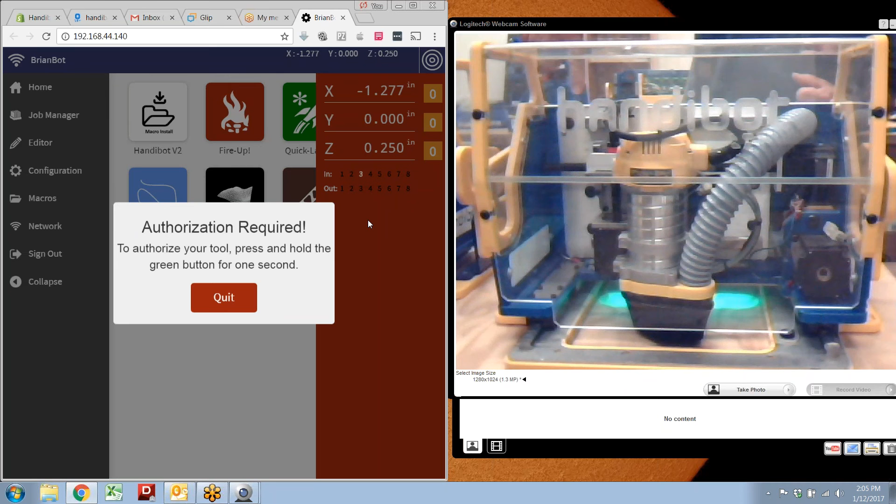Okay, so one thing you'll notice when you try to move your Handibot around is that you always are required to authorize your move. What that means is you have to hit this green button on the back of the tool and just hold it down for about a second, and then that allows you to move the tool around. And that authorization lasts for 30 seconds.

That's really a safety feature that we're hoping people will use if they're working in a classroom, just to make sure that nobody moves the tool around when someone has their hands inside it. But when you're working on your own, it's a bit of a pain, so I'll show you how to disable that to make operation smoother in your own shop.

To do that, you just go to the configuration menu in your FabMo dashboard, and there's a sub-menu under configuration called Machine. From that sub-menu you'll find options for the authorization button, and all you have to do to disable it is select the input and say no authorization.

Now, when I go back and move my tool around, it no longer asks for any authorization. That means if I'm running a job and I hit play, it's going to start that job right away with no questions asked. So just be aware that that's going to happen. But at least for me, when I'm working on my own, it makes things a lot easier.

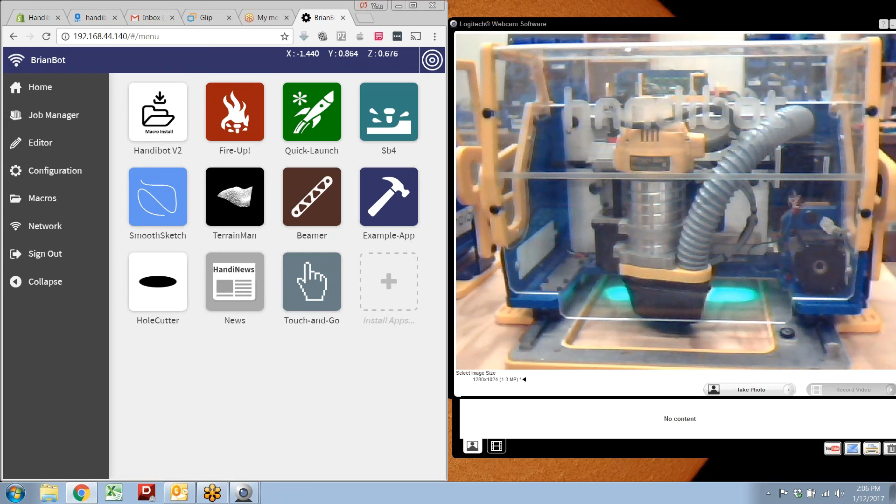I'm going to ask Jared to mute his phone so I can't hear Jared in the background.

Alright, so the first question I heard was about Z-zeroing, which makes sense as the next thing to talk about. Let me open this up.

Oh yeah, I just got reminded there's a link Bill sent everybody to download an extra app for your Handibot. If you follow that link and download the app, then install it using the Install Apps button, it'll be the Handibot V2 macro installer. Once you open it, just click to install all the macros on the Handibot, and that will update the macros that handle Z-zeroing, homing, tool changes, and a lot of other stuff, making Z-zeroing a little more reliable.

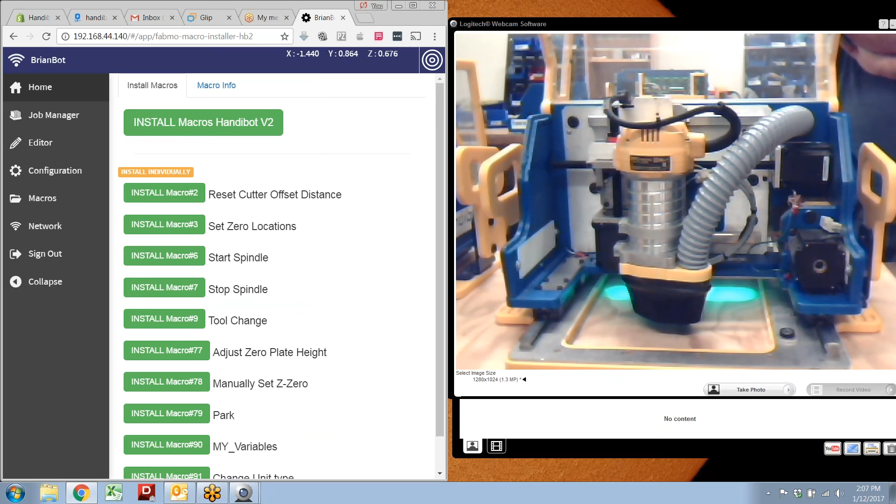So back to Z-zeroing, you've probably been using this plate right here. I know someone has already bent theirs up, and I can get another one sent out to you. To make sure everything is connected correctly, what's really happening is the tool—this clip right here—is connected to your bit, and then that completes a circuit with this plate.

You see there's an input number 1, right underneath the Z-axis position in my readout, lighting up when I touch this clip to the plate. That means the circuit is working. So when I connect this to my bit and the bit touches the plate, it completes the circuit, and that's how it Z-zeros. We'll go ahead and do that now.

Let me take this—yeah, I'm going to move this up and just pop this guy off. We can set him over to the side. So Z-zeroing, you do it from the FireUp app, and the function is called actually measuring the cutter.

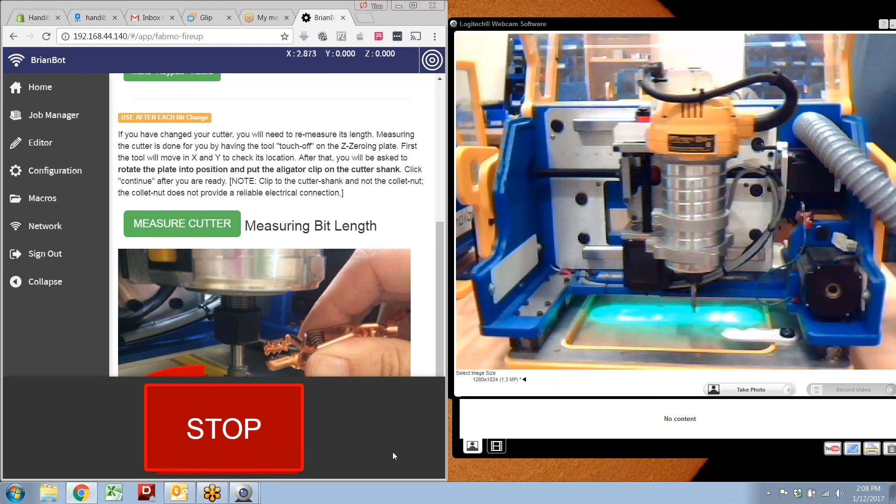What that did first was find the X and Y home, and it bumped itself off the hard stop at the Z-axis to make sure it has a reference point for the bit measurement. That way, if you lose position or the tool is turned off and you want to come back to the same spot, you can run the homing routine again and it'll find the same position. It automatically moves over the Z0 plate, and that's when I connect my clip and just hit resume.

So it does a fast touch, and then comes back for a more slow-moving touch to get an accurate Z0 measurement. You slide this back in, then hit resume to save that measurement.

Yeah, so can we ask questions as you go through? Oh, please do, yeah. This is Dan—so when I did mine, this is where it just drove that piece of aluminum right down. Mm-hmm.

And I did have the clip on there. Right, so did I do something wrong? Well, did you have it on the bit itself or on the black collet? Because on the bit.

On the bit, okay. That's why I'd say check to see if touching the clip to the metal on the Handibot actually lights up that input. Because if it doesn't, there may be something wrong with that circuit, and we can troubleshoot and get that fixed. So what's it supposed to light up? If you see on my screen the position readout for the tool, right underneath the Z-axis, there's a list of 1 through 8 inputs and outputs.

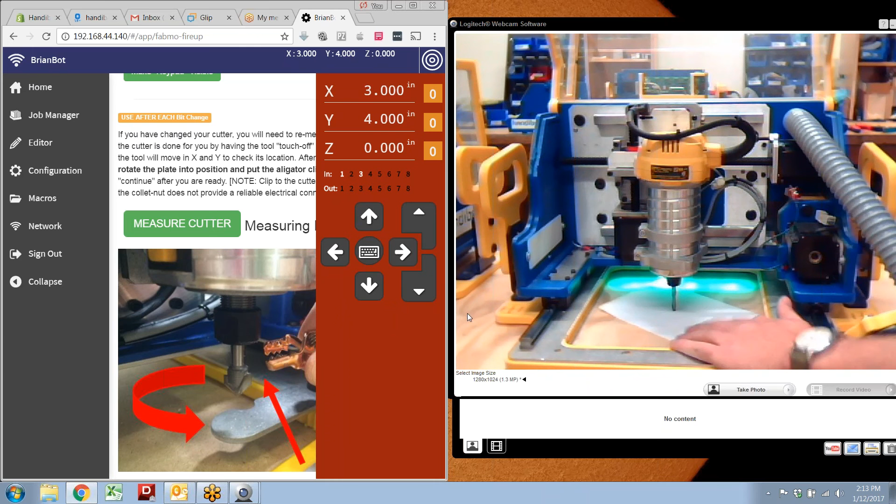Because I'm able to slide this paper underneath it, obviously it's not quite low enough. I want it a little bit lower, so I'm going to tweak this measurement to make this Z-zero plate more accurate. If any of you have worked in a machine shop before, you've probably done the same kind of zeroing method for an end mill.

You just slide the paper back and forth and slowly step it down. I'm using this directional keypad on the red bar, clicking the down arrow on the far right that controls the Z-axis. Every time I click down, it goes down by 0.005 of an inch, and I slide this back and forth until the paper gets stuck. That means my Z-zero plate default value was 40 thousandths too high.

So we'll just go correct that in the software really quick.

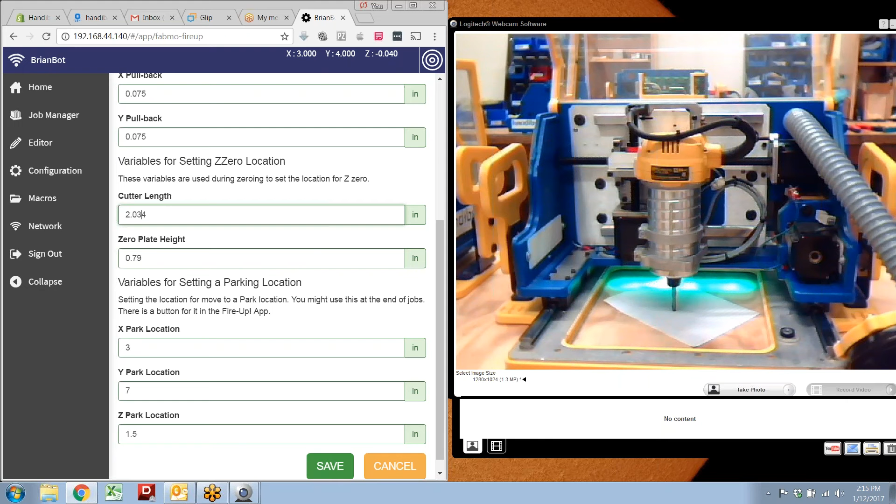And then I could either run the Z-zero routine again, or just update the cutter length here to 2.034, which will correct the cutter length and should make my zero measurement accurate. So I'll save that, and just to try it out, I'll send it back down again.

So I'll send it up to 1 inch, send it back down to 0. And now it looks like I got this a lot more dialed in. That's pretty much all you'll need to do.

You only need to reset the Z0 plate height once, and everything should be good. Or if you bend it, like what happened to you before, you can put the plate close to where you think it's level and adjust as well if you forget to put the clip on. Once the cutter has been zeroed, it stays zeroed as long as you re-zero with macro 3 after you repower. So I'll go ahead and run that now. When you turn off your tool, take it on the road, plug it back in, turn it on, and then run the XYZ zeroing routine again.

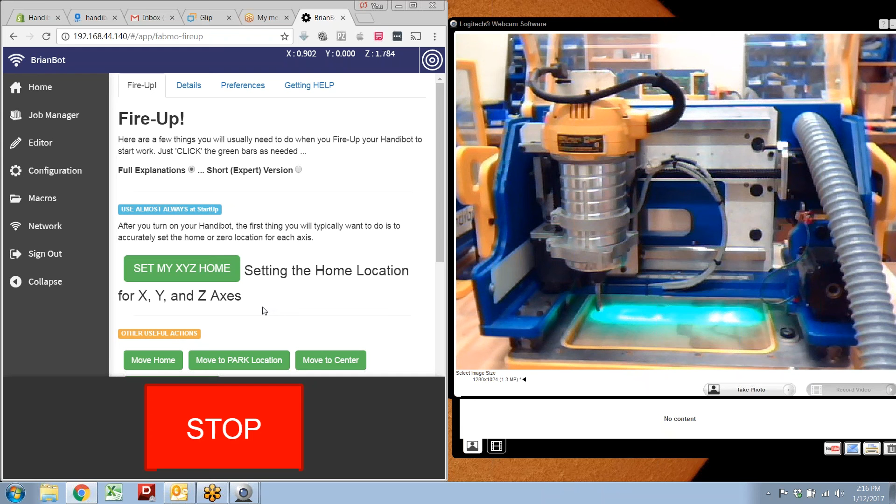Okay, just to be sure, I'll send this back up to the middle and drive this down to 0. And that'll return to the same spot.

Okay, so before we go any further, did anybody else have any questions about the homing macros?

Maybe show them how they get the same macros that you just showed in Fire Up — the macro page. So the macros themselves are all stored on this macros tab right here. The one we were using was the set 0 locations. If you really want to dig into it, you can come in here and, for example, edit where the tool goes after it finishes zeroing, but you really don't need to mess with these. If you wanted to just run them from here, it's a little faster — you can just hit play, and it'll run the macro directly from the list.

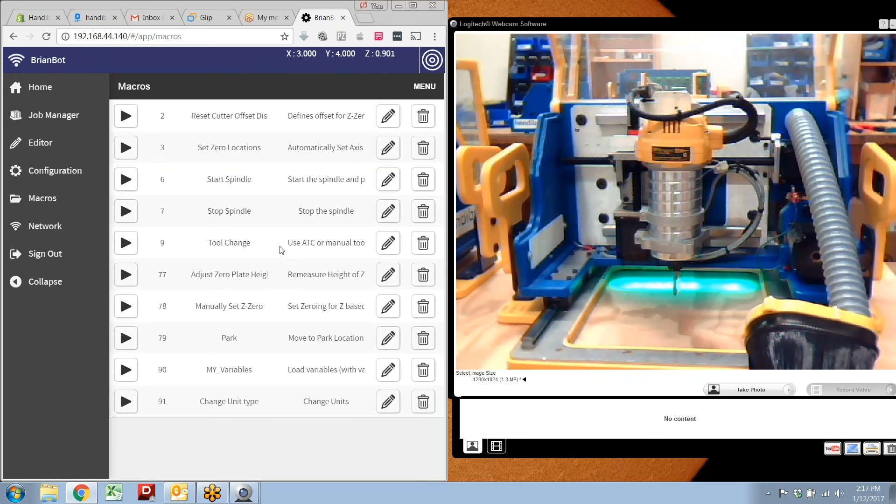So can I ask a quick question — the FMA file that you gave us, should that just be copied somewhere? So I'll show you how to install an FMA.

You just use this little blank app down at the bottom of your dashboard. If you click that, it'll open up a list — sort of like a file search — and you can type in the name of the app you want to install.

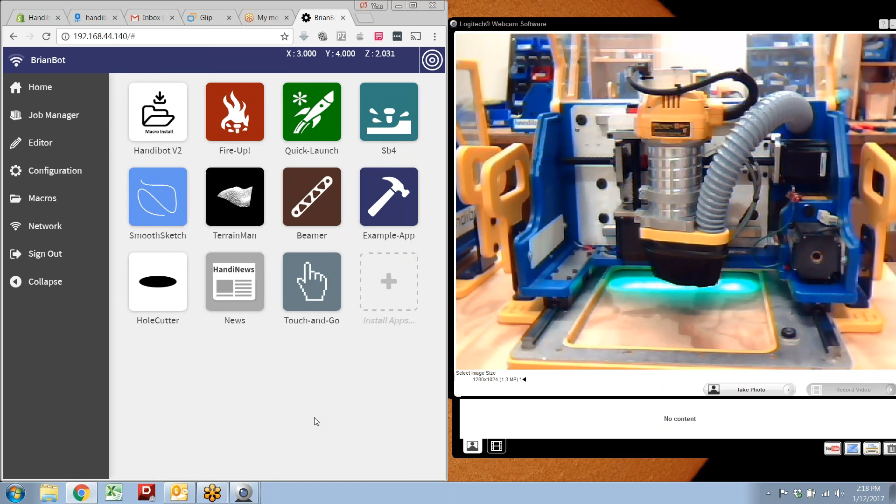So everyone, this macro and the way they're teaching you here is if you had a fixture on your system and you set that 0 position, you could just throw stock in and out and it would always set up. Now if you were just doing individual programs for yourselves, you don't really have to set a hard home — you can just go and touch off the X, Y, Z on any corner and just run it. So it'd be good if you guys showed them that too.

Yeah, actually I'm going to show them the way I usually zero the tool, especially in Z — that seems to be the quickest. It's kind of a quick and dirty way, and it's easiest for me, especially if I'm changing a bit. So I'll go ahead and change a bit, and I'll show you how I quickly re-zero it after a bit change.

What do you need? A pair of pliers. Okay, something big enough to get around it. Got it. You just want to call it a wrench?

All right, so changing the bit, you can take the router out pretty easily. Just unplug the power cable to the router, then loosen the couple of screws holding the router in the router bracket. There should be a little 4mm red-handled T-wrench that came with your tools that can pretty much loosen any screw on the Handibot.

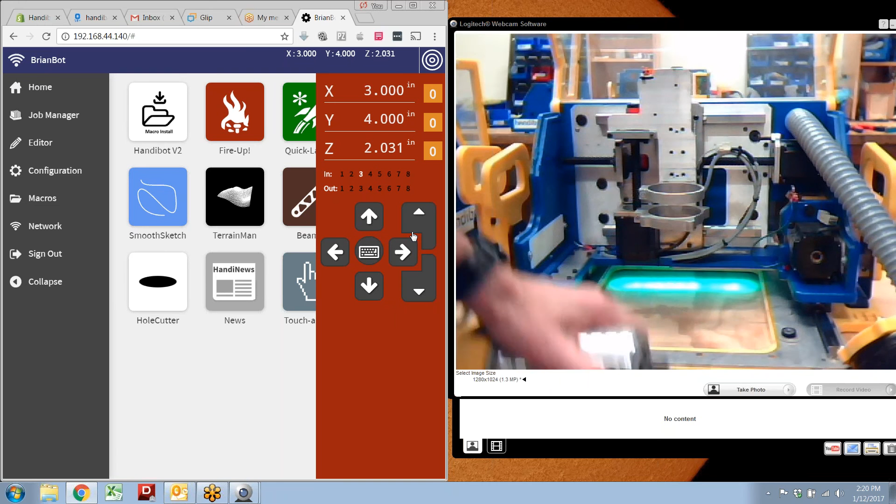So changing the bit, this yellow button right here will lock the spindle, and then you just use the little collet wrench that came with the tool to loosen the collet. It's also not too much problem to do that with the spindle still in the machine. Then we'll just clean out and make sure there's no sawdust in the area of the collet that needs to be folded up to hold the bit tight.

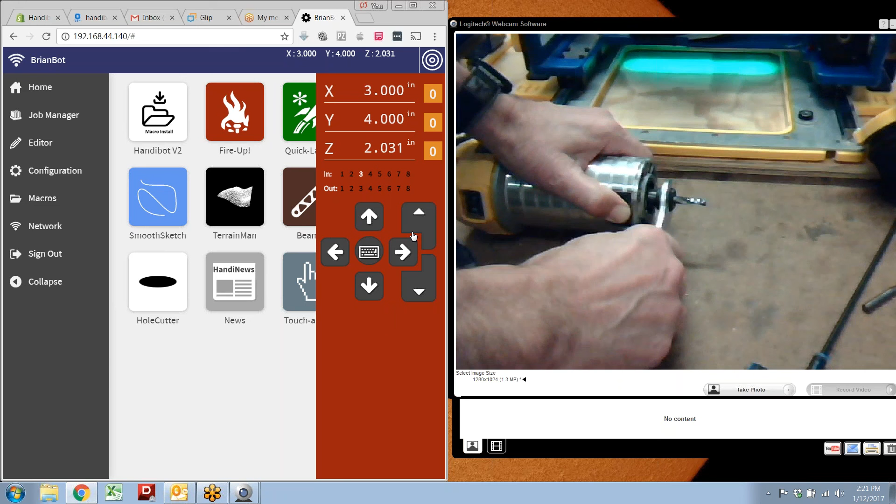Okay, so here's where my quick method for zeroing the tool comes in. Rather than putting the router back in there and running the zeroing routine again, I'm just going to send this down to what should be 0. Then once I slide the router in, I drop it down until the bit's touching the material, and then tighten the router bracket. Now my router is locked in at 0 with the bit directly on the material. Just plug it back in and you're ready to go. That's, to me, the easiest way to do it.

And if you're working on a material that's hard like wood, then that works really well. Now if you're doing something like foam that the bit could break through, then maybe you'd want to do the Z0 plate. But this, to me, is a lot faster.

Another way to do it is to break your program by tools, so you have individual programs by tool. When you're setting up a cut in Fusion, you could save each tool path out based on what tool it uses, and then the program will naturally end. You change your tool, change your bit over, then start the next one. So yeah, that works as well.

So any other questions about finding home with the tool or zeroing the tool?

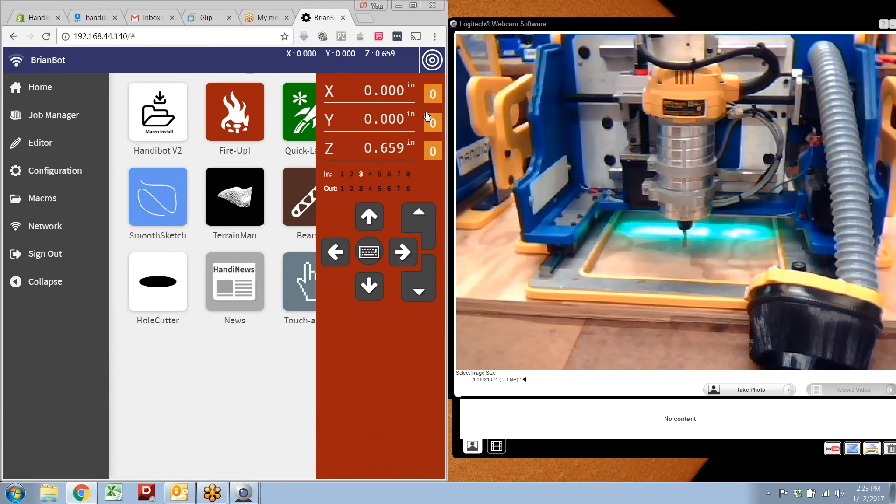Now if I want to set up an alternative 0 point, like if I had set up a carving file that was centered around the 0, 0 location of the tool, so wherever I zeroed the tool, that's where it was going to cut the design, I can manually set the 0 by clicking these orange 0 buttons next to the axes readout values, and now that's my new home position. So if I go somewhere else and then send the tool home by typing in 0, 0 for the X and Y, it's going to go back to that position I just called out as home. That way you can do an alternative homing if you don't want home to be all the way to the left and front of the tool.

That's not saved, though. If you do it that way, it's not saved between sessions. So when you go back through the Z0 routine at the beginning, it goes back to whatever's been saved originally after a restart.

So I've got a question for y'all. How many of you have run jobs on your tool yet? Have any of you run tool paths so far? Not yet. I know Ivan has, right? Nope, I just got mine connected to the network this morning. Okay.

So now we'll skip over to running tools. Really all you need to do when you turn the tool on is do this homing routine, get everything set up, and then you can jump right over to actually running your tool paths out of Fusion.

So the Job Manager is the app that controls all of the cut files that you're going to run. When you first come over there, you can either drag files there, or just click that icon and it'll bring up a search window that lets you go find a cut file. In this case, we're using Shopbot part files, and I believe there's a post that's active right now for Fusion that'll output a Shopbot part file. But we can also run G-code as well, if that's what you have.

When you load your file, you'll get the option to preview it by clicking the little eyeball icon, and that'll give you a preview of what the cut file is going to look like as it runs. You can also edit the file if you need to, if there's anything you need to change, like a move speed, and then you want to run it again.

Or you can download the job. If, say for example, you've got a job that's been stored on the Edison for a while and it's not on the computer you're accessing the tool from, you can download that file to your computer and save a local copy, or you can just delete the job.

So once you've loaded a job into your tool, even after you delete it, it's still stored in the history of the tool once it's been run. Let me go back and load a file again. So any job that you run will be stored in the tool after that.

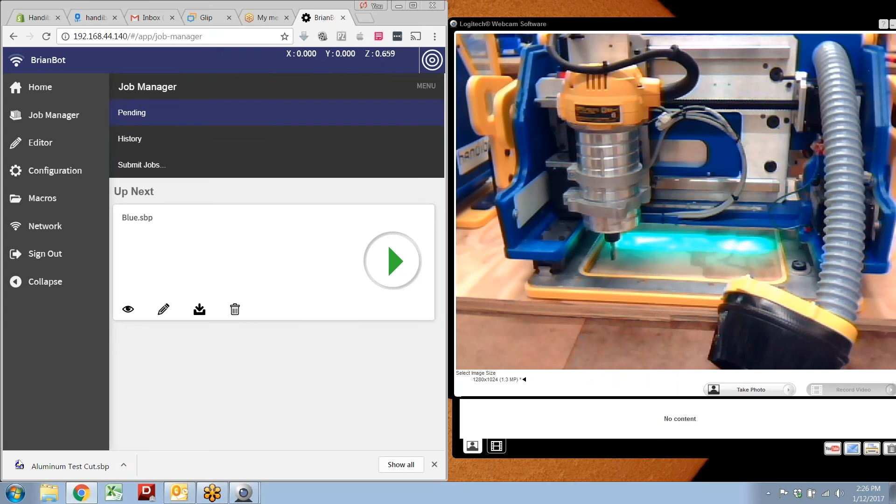I'm not sure what this job is. I'm going to move the Z way up so that I don't cut into my table by accident. And we can pop that dust foot out. So to run, hit the play button. If you still have authorization enabled, you'd have to press the green button after hitting play, but I've disabled it, so I won't have to worry about it.

This is warning me that there's a tool change somewhere in my file. That's fine, I've just got multiple tool paths, but they all use quarter-inch bits, so I'm not concerned about that. But if you do have a tool change, it's going to warn you here.

So you can see there that if you hit that flashing stop button at the bottom of the screen, it'll pause the movement of the tool. The spindle will stay turned on and stay down in the material, but it'll just pause the actual movement of the cut. From there, if you hit resume, it'll continue doing the cut, or quit will exit out and turn the spindle off.

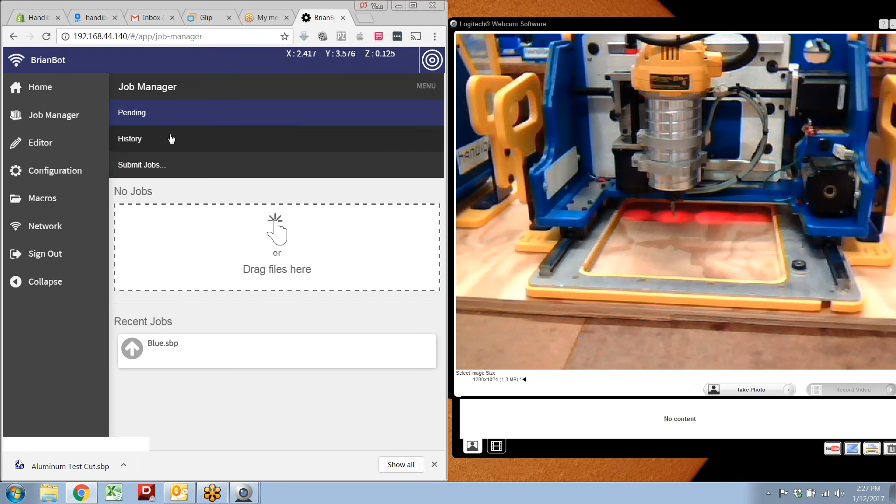So now that I've run that job, it's stored in my history, and if I want to, I can load it back into my queue and run it again. So now that's kind of permanently there. And if it rolls off the bottom of the recent jobs screen, I can go over to history and find that job, add it to queue again, and run it again if I want to.

Do you have an option for pause to stop the spindle as well? Not yet. It seems like it would be pretty trivial, but the trick is that to stop the spindle, it's got to pause, and then it's got to run another line of code. So that's actually going to be an update we're going to release next week, because that would be really helpful for me, I'm sure.

In the meantime, could you just flip the power switch on the router head? Definitely, yeah, let me show you how to do that. So now it's just paused, and I've just turned the power to the router off. Of course, if I hit resume and forget to turn the router back on, I'm going to gouge into my material and possibly break my bit. But as long as you remember to turn it back on before you start, that works just as well.

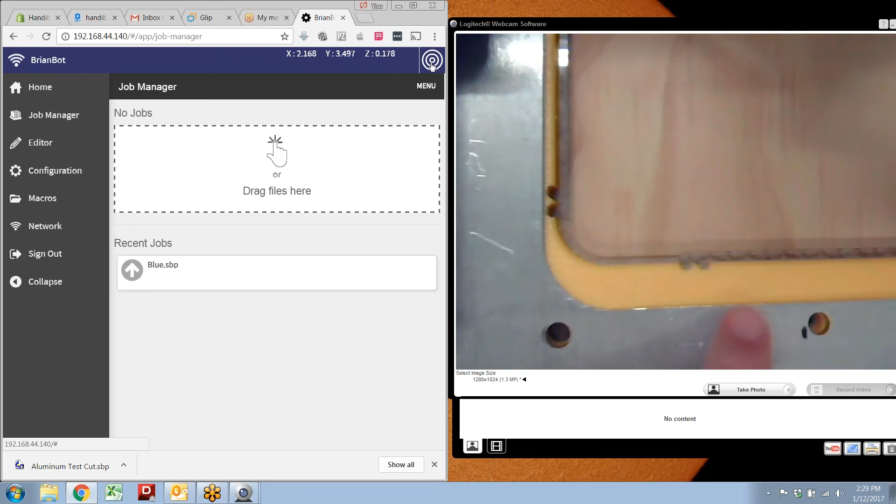Can I ask a real silly question? The XY00, is that at the lower left-hand corner of the screen? Because if I'm looking at where that yellow area is, it's filleted, so is the 00 the filleted area? The 00 should roughly line up with these two marks on the base plate of the Handibot. Okay, so it's inside. Yeah, the bit 0 will be like right about there. And just so everybody knows, I think either Jared or Jeff has this wooden fixturing plate on it. I took a piece of wood and rounded the corner to match that fillet and screwed it down to the base plate of the machine.

And then I just ran a contour right along the X0 and then Y0 lines, just to have sort of a fixturing plate, so any block of wood you slap in there is automatically zeroed. I can share that Fusion file with everybody if anybody wants it. Yeah, that would be helpful. Just put a line with a V-bit on there, and it looks real.

The other thing too, Dan, is there's two zeros. One is the hard home for the machine, and the other one is the one you set right before your program. So your XYZ 0 right before you start your program can be anywhere, while machine hard home is one fixed place.

Right. Yeah, tool zero and file zero are not necessarily the same place.

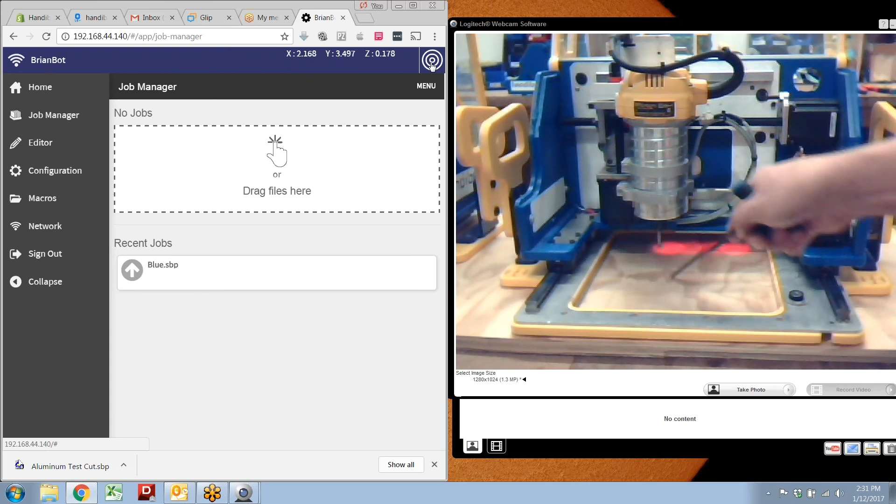A lot of times I'll use that when I'm cutting out a lot of small disks like this. If I just have the file set up to cut one, I'll cut one here, then move the tool over, re-zero the x-axis, and run the file again. It'll cut out the same exact thing but shifted a little bit. I can keep shifting the tool around and re-zeroing it to cut multiple copies without setting up a big file with a bunch of nested parts. It works like a cookie cutter that way—you find an open spot on your board, re-zero the tool, and run the file again.

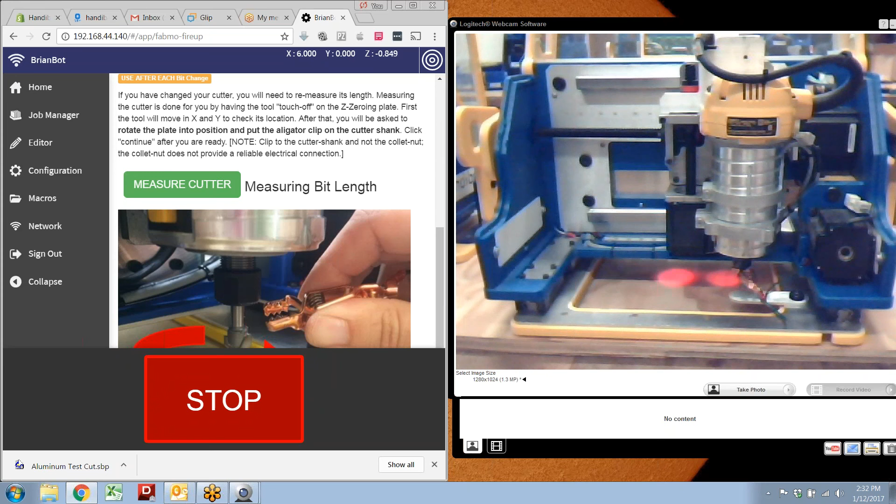Ivan, this is Jeff. Is this meeting supposed to end at 2:30, or did I not accept the right meeting? No, the first one was just the general CAM meeting that I added because it was always at the same time. This meeting will go as long as they're presenting. Okay, just checking, I may have to jump off. I'm going to need to jump off in a second too. Well, I'm here till 5, so I'm happy to stay as long as anybody else would like. Don't feel like you have to stick around if you've already got what you need. Please share the recording with us. Of course, this is super helpful though. Good, thank you, no problem.

Okay, so I got my tool zeroed. I'm going to type in zero to send it home. Now I'll pick a job that hopefully will work with a quarter inch bit. Let's see.

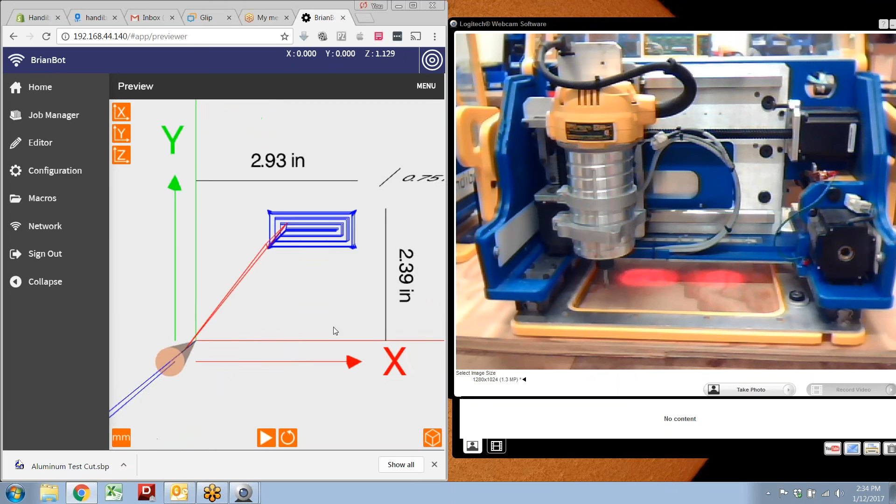So you're going to save your NC file or your ShopBot file locally somewhere out of Fusion, I'm assuming. Right. I don't know what Pocket 3 is, but that's what we're going to run—we'll find out. Well, I guess we can preview it and see what it's going to do. Okay, so this job looks like it's going to just cut out a little pocket in our material, which is supposed to be 3/4 inch thick, which is correct. So we're all good.

All right, so back to Job Manager. Hit play. Is it turned on? No. Okay, now we are. All right, here we go.

Uh-oh. Oh no. Well, that's an interesting problem, guys. Let me take a look at that file. That was weird about that one. There's no stop button—there's no stop button.

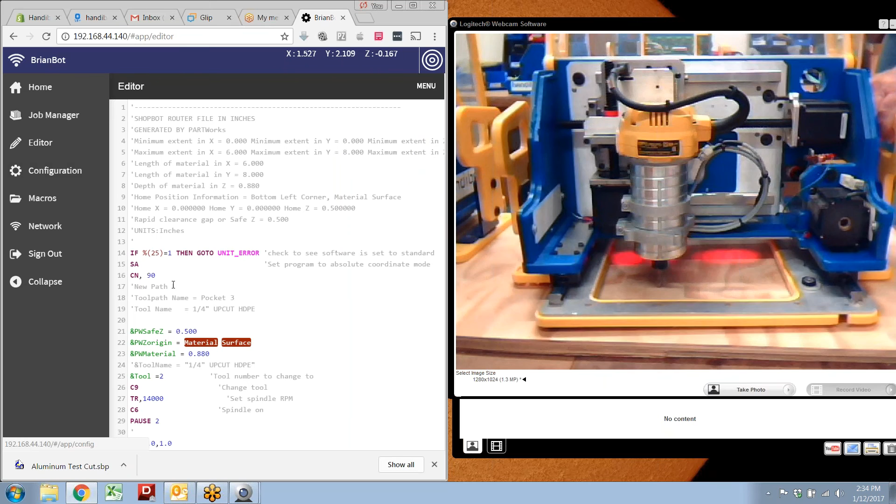There we go. So, welcome to a demo for your peers. That was a good example of that little red button on the side, which you might not be able to see—this one right here, that's kind of like the 'oh shit' button. So if you lose control like that, you can just hit that button and it'll stop the tool.

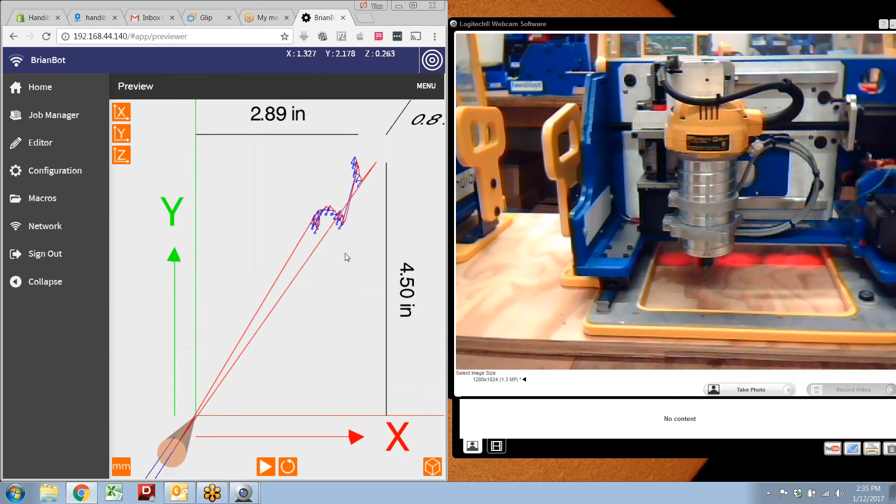Okay, let me find a different file. Let me see what this one looks like. Why did the router go? Looked like your spindle just didn't turn on. Well, it turned on, then it turned off. And then it didn't even let me have a stop. But I'm not sure if that was an issue with one of the macros called at the header of that file.

So Ivan and I worked on the post processor for Fusion a while back, because I think Ivan you were having a similar problem, and there was something the post processor was putting in the header of the file that was tripping up FabMo. So I wonder if that might have been an older file I had run before. So let me run a different one, and hopefully we'll do better on this one.

Okay, so I've added this job, blue, to my queue, but it still has this pocket job up next. So I'm going to trash that one, and then run blue.

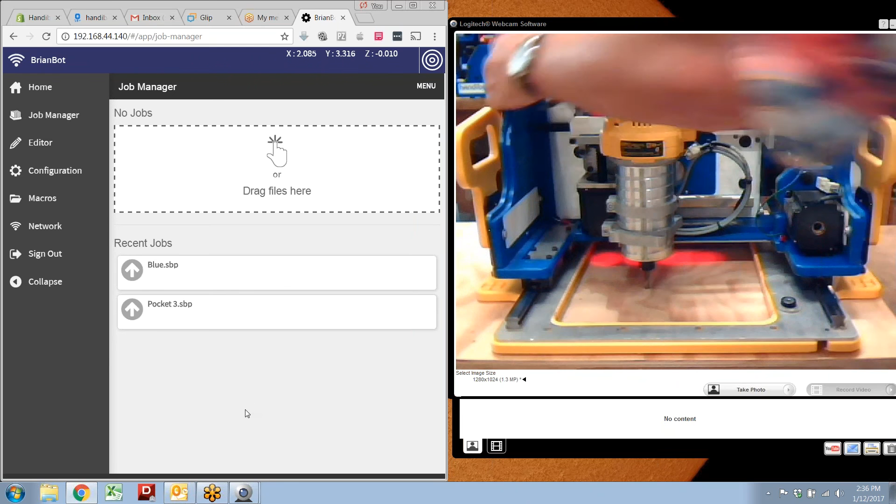All right, let me try one other thing. So we'll do a smooth sketch, which is like the most basic kind of job you can do. I'll just draw out something here, my name. And this should create a G-code file that the tool has no problem with.

So, are you cutting material? Are you holding it down somehow, or are you just cutting air at this point? Yeah, the tool weighs about 50 pounds, and there's a neoprene rubber bolted all on the base, and that holds the tool in place pretty well.

So that is not, I mean, unless you're really hogging out some material, I don't ever really worry about holding the tool down. You could, of course, drive wood screws through these holes in the front of the tool if you really wanted extra holding power.

Yeah, I think a couple of your setups actually have a sacrifice plate already on it, and you're not cutting through stock like that. So what you would do is clamp the piece you want to cut on top of the sacrifice plate. Or what I do a lot too is save old cardboard boxes and use those as a substrate underneath my material, so that if I break through the material, it's not going to cut up my table or whatever.

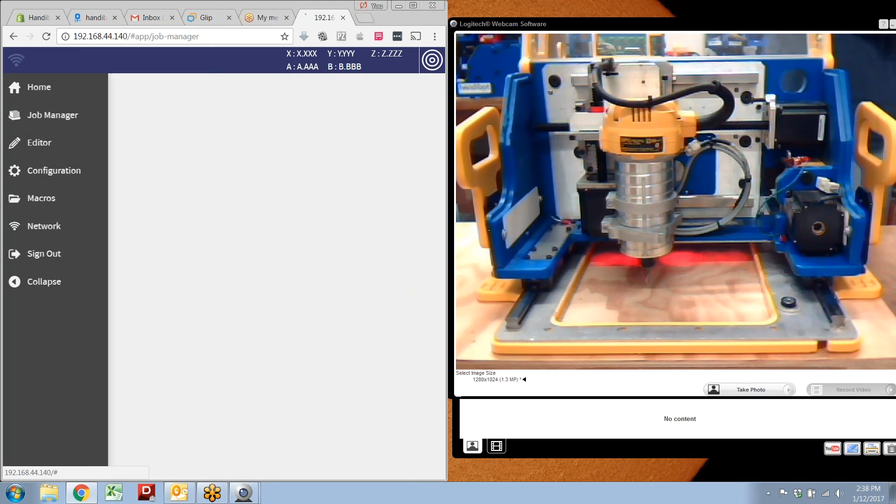Okay, so your zero is really the top of the material that you're cutting? Correct. I'm thinking zero is the bottom of the material, but it's really the top. That depends on how you set it up in Fusion. For my guys, and for beginners, what you should really do is pick the bottom left-hand corner, because it's easy to get to, set your 0,0 to touch the front face of the stock and touch the side face of the stock. So just use that to start from now, guys. Yeah, and zeroing to the top of the material is a lot easier than zeroing to the bottom of the material as well.

All right, so let me see if I can get this. While that was running, you could see there was a little progress bar at the bottom right that gives you a rough idea of how far you are through the code on the job that you're running.

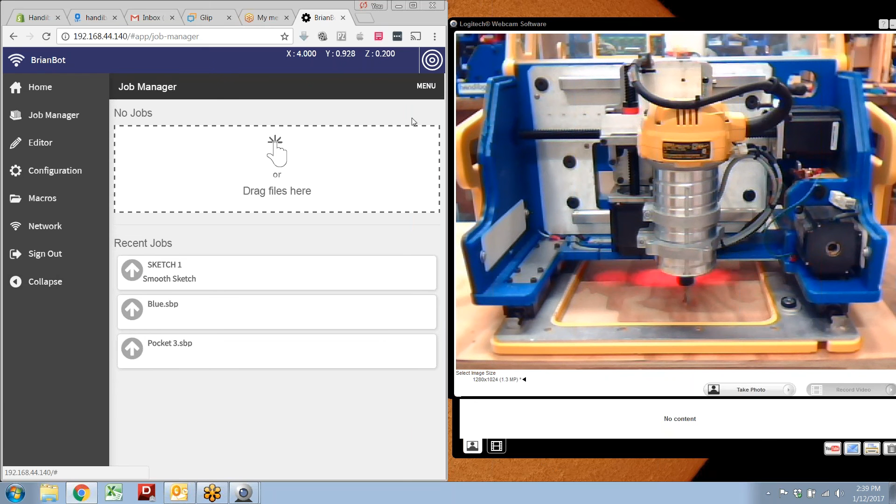I needed to zero the Z again to get that one down to material, but that would have drawn out that sketch. So let's preview it, the sketch that I created earlier. Yeah, so that would just be a carving or an engraving of that sketch. If you have a V-shaped bit, then that works really well for doing quick engravings.

So yeah, we're kind of, like I said, we had just installed a new version of the software, so we're trying to figure out why the router was turning off. But the versions that you have are possibly a bit older than the one I have installed today, so hopefully this isn't really an issue for you guys. So if you try out a toolpath and the same thing happens to you, definitely email me, and I will figure out what's up with the code in your file and get it fixed for you.

So one other thing that I want to show you guys, it's a problem I run into myself a lot, and that is the... One second, Brian. Oh sure, go ahead. Jeff Lee, you still on?

Yep. Okay, so in the gallery they have a couple more of these, and they got the post processor working good in there. So if you could get a copy of the post from them and distribute it, that would be good. Okay, oh yeah, I'd love to see that as well too. I've got a customer working with Fusion right now trying to troubleshoot the post processor. So yeah, if you guys have that copy, I'd like to see it as well.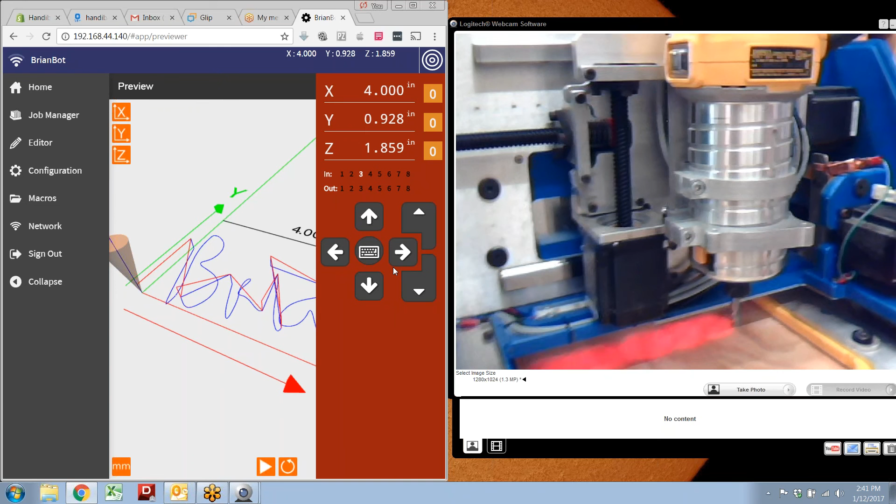So what I wanted to show y'all was the bottom of travel for the z-axis is determined by this bolt right here, and that's really not like a hard stop. It's just there to keep the tool from crushing any of the wiring down here.

But what happens a lot of times is someone will zero their tool and think they're ready to go, but if they're cutting through something that's an inch thick, their zero point needs to leave at least an inch between this surface right here and this bolt head right here. And if not, then the tool will come down, hit the bolt head, stop plunging into the material, and it won't cut all the way through.

So almost, I would say 80% of the time that someone's afraid that their z-axis is broken, it turns out that we just didn't have enough travel left on the tool. So just something to be aware of when you're setting up cuts.

The kind of cool thing about the Handibot is that not only can you remove the router or move it up and down in the bracket, but the bracket itself has multiple locations that it can be attached to that Z plate. So if you're using a really long bit, like later today I'm going to be doing some engraving using this diamond tipped engraving bit, which is really long, I'll move this router bracket up to one of the upper positions to give me enough room to move this engraving bit around on these dog tags I'm going to be doing down here. So just something to keep in your back pocket for when you need to make something work in a tall piece of material.

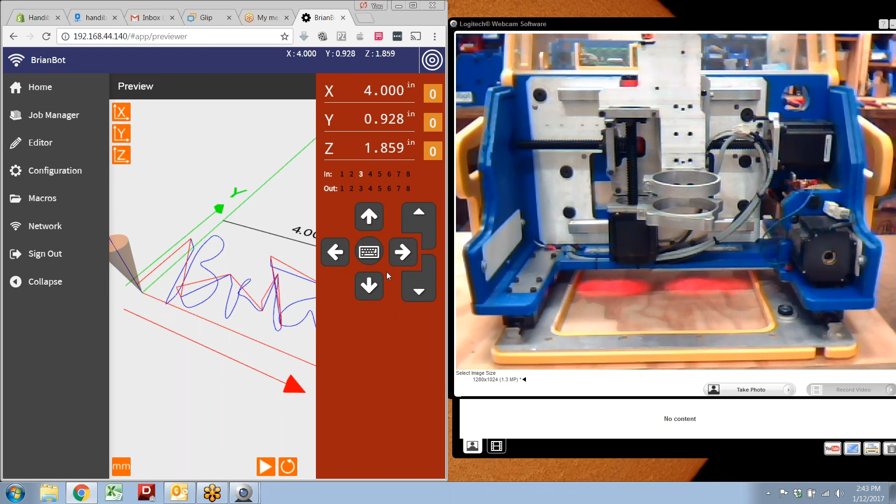Okay, so while he's gone, once again just to review: you design your model, you put your tool paths on it, and then when you go into setup, you set your zero position, which will be the lower left-hand corner, top of the part. Then you come in and set the tool to that same position that you set the setup point on. So it'll be the lower left-hand corner of the part to the center of the cutter.

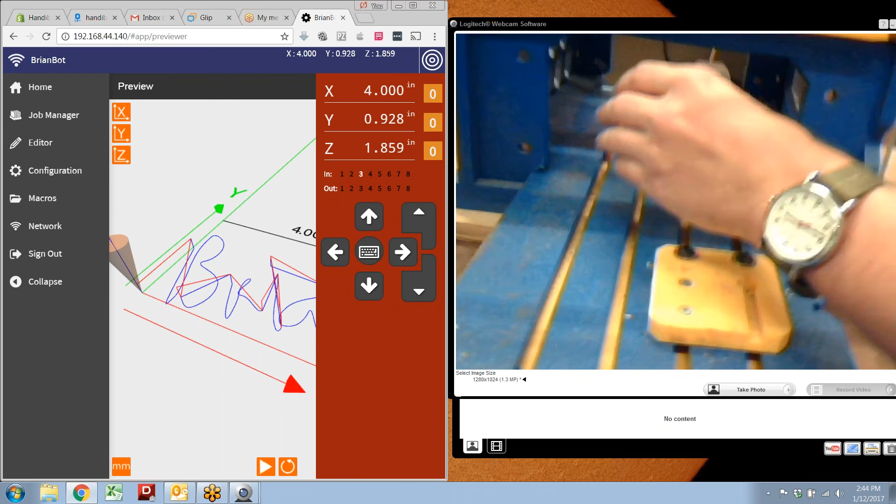So yeah, this one's a little bit beat up. This is the one that's been living in my garage for the past couple of years, but this is just what we call the accessory base, and it's sort of a plastic version of T-slots, and you use the same T-nuts and screws that you would on an aluminum extrusion. We mostly use it to hold down the rotary indexer. But we've had guys that have used this for long boards that they want to index through the tool, you can just slide a big 4x4 board through the tool that way. It's just a nice way to keep the tool secure while you're working on something large underneath the tool.

But you don't have anyone that just goes in the Handibot as it comes, right? You have to have that auxiliary. Yeah, I think y'all might have been a bit early. There's that piece of MDF that's attached to the bottom of your Handibot when it's shipped to you.

Does yours have any slots on the back? I'm trying to remember. There was one afternoon where I was trying to work on some boards, and I'd flip one of those over and cut slots in the back and put these little inserts in there that lift the tool up and give you kind of like a 1.5 inch throughput area you can work underneath the tool. And I started shipping that with Handibots, so I'm not sure if that was on the ones y'all got. No, it wasn't. Okay, well, I can get one of those out to you, Ivan, if you want to take a look at it. It's just sort of like an MDF jig.

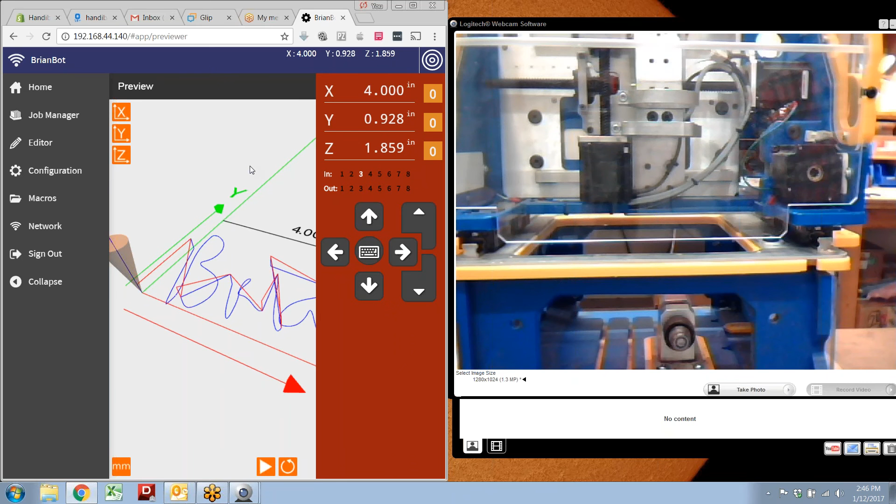It just kind of makes it easier. I've been doing a lot of sign making recently, and it gives me an easy way to slide my boards through when I'm doing sign engraving. You got your regular test base board that ships on the Handibot, but now when you flip it over, there are these additional slots that you slide these little keyed pieces into, and you bolt them down, then you set the Handibot on top of the whole assembly.

Oh yeah, we got that board, I thought it was something else. If it came with these little L-shaped pieces, you can use those, and it creates a pretty effective little jig that will support the Handibot and allow you to do some more large material work.

No, I'm more talking about affixing stock to the sacrifice plate. Oh yeah, like if you guys have a low profile vise, or a T-slot table or something like that. There's a really low profile T-slot that we use as the deck on one of our larger tools, the Desktop Max, which might actually be pretty good for that.

I got a piece of that right here as well, let me show you. So this is like a real thin profile aluminum extrusion. That's kind of what you're thinking about? That's exactly what I'm thinking about, because then you can put the Shop Box paint clamps on it and a bar, instantly hold stock.

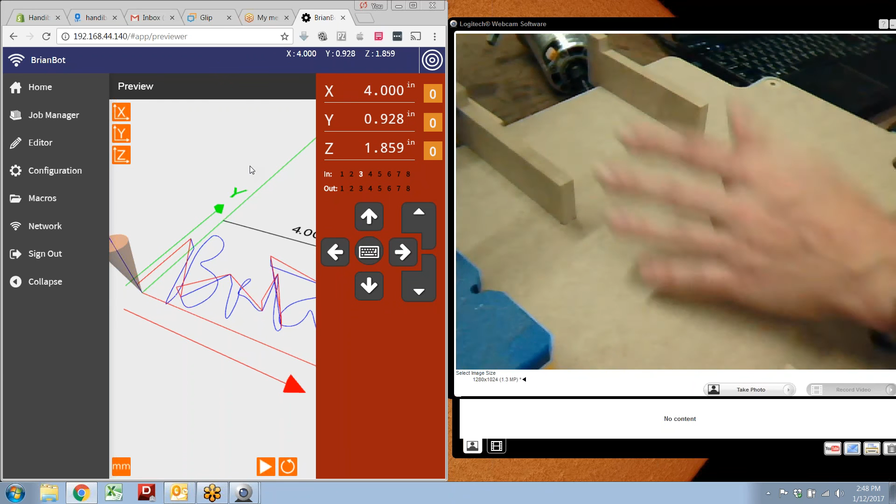Yeah, that would be great actually. Alternatively, for the vise, what I've done in the past is I've just milled out a rectangle the size of the vise in my material, and popped it in there. I like that method because when you mill the pocket out for the vise, you know it's going to be square to your tool, since you're pressing it up against an edge you milled with the tool. And the base is going to be perfectly flat with respect to your tool.

So that's a real quick and dirty way to do that kind of job. You can do it on just a piece of plywood like this—put your tool on top of the plywood and mill your pocket into that, like someone else was saying, to make a jig.

I was thinking more of the plastic side, because it would be easy to machine, and I've got big routers so I could cut it if I had materials. Let me show you how this is put together in an interesting way. This is just two pieces of plastic—you see how we milled a step in this one, and then it's bolted from the bottom into this larger piece of plastic, so you create the effect of T-slots using just two pieces of plastic.

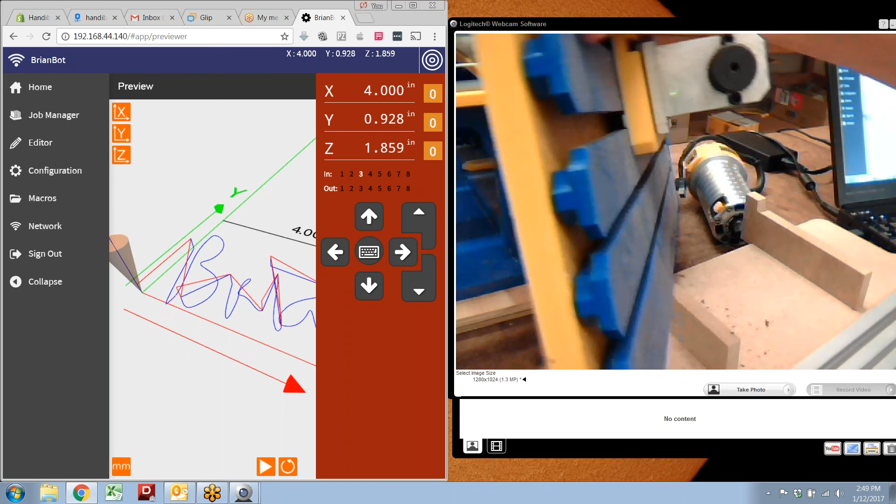So you can kind of make your own. This kind of HDPE is available from Inventables or even Home Depot sometimes. It's called King Starboard—sometimes you call them cutting board blanks too. You can get them in like 2 foot by 3 foot or 2 foot by 18 inch. It's like a boat deck material, the exact same stuff as this, just more natural tone colors, and you can get that at some hardware stores.

I think all these guys need a quick fixturing system so they can have multiple projects, know how to set it up, and easily index stuff out. I don't know if you've ever talked to Sally, but she works with ShopBot, and she does a lot of really cool fixtures for trade shows that she goes to.

She'll do a lot of nameplate engraving, so she'll make a bunch of blanks to carve people's names into, and she'll build jigs that let her swap them out really quickly. Even bases that slide out, so you can pop the base out, replace the blank, slide it back in, hit go, and it always goes to the same place. So she's done a lot of thinking on that problem.

We'll show them the collar on the router so they can change over routers instead of changing bits. Bill just reminded me of another thing we've been doing to speed up the multiple tool cut process - this little plastic ring, kind of like a hose clamp, that's a collar that grabs your router. Because you can unplug the router from the tool, it's a lot easier to just pop out your router and pop in a new one with a different bit, and start going again.

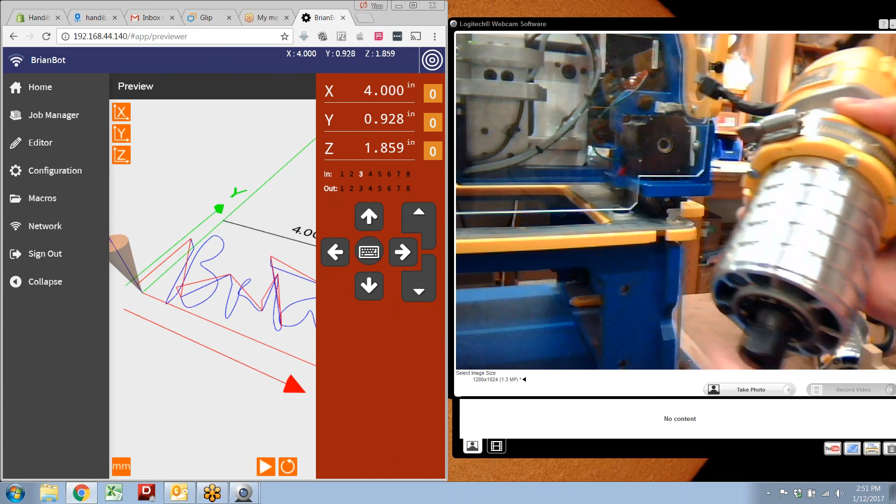And what you can do is set all of them to the exact same zero location, so you never have to re-zero between cutters. All your routers are preset to be at the exact same position with respect to the end of the bit. So you just have a cabinet of routers, and you pop them in and out. The routers are pretty cheap, almost the price of the bit, so it makes sense to have a couple of routers if you're doing multiple tool operations and don't want to stop and re-zero your Handibot in between.

A lot of times you machine away the place where you want to zero in an earlier step, so this avoids that - they're all preset to zero. And then you can also put collars on your bits, so the bits always index at the same depth.

Ivan, I think you'd been asking about different size collets. Yeah, it ships with a 1/4 inch - that's what DeWalt sells with the tool - but there's a company called Elaire that makes aftermarket collets for DeWalt routers, and they have a range of sizes.

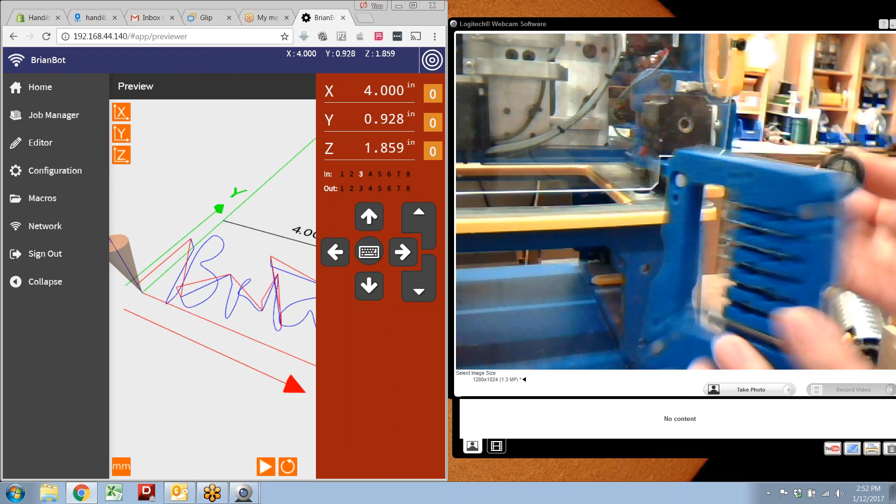I wanted to put together a bit kit for milling circuit boards, and circuit board milling requires really tiny bits with 1/8 inch shanks on them, so I buy their 1/8 inch collet for the DeWalt, and then I can use these really tiny like 64th, 16th, or 32nd bits with my router.

So DeWalt only offers a 1/4 inch? Yeah, DeWalt only officially offers that 1/4 inch - all the other stuff is made by other companies, but they're pretty high quality. They don't go higher than a 1/4 inch though - that's the biggest that'll fit in the tip of the router, but you can get down to like 1/8 or even a 16th or something like that. So they have some pretty tiny stuff you can get if you need it, and they also have metric collets for metric size tools.

So I'm curious now - you said you can use a 1/64th bit on it. What's the resolution of the machine? How fine control do you have of those servos? So the servos - they're actually stepper motors - will move the tool in 1/4 of a thousandth of an inch steps.

But you have to factor in backlash that's inherent to the frame of the tool and all that stuff. Once you factor all that in, it comes back up to about 1,000th or 2,000ths of an inch. A 64th is about 0.015, so you can get pretty good resolution when doing circuit board work with the Handibot - definitely powerful enough to mill through circuit boards.

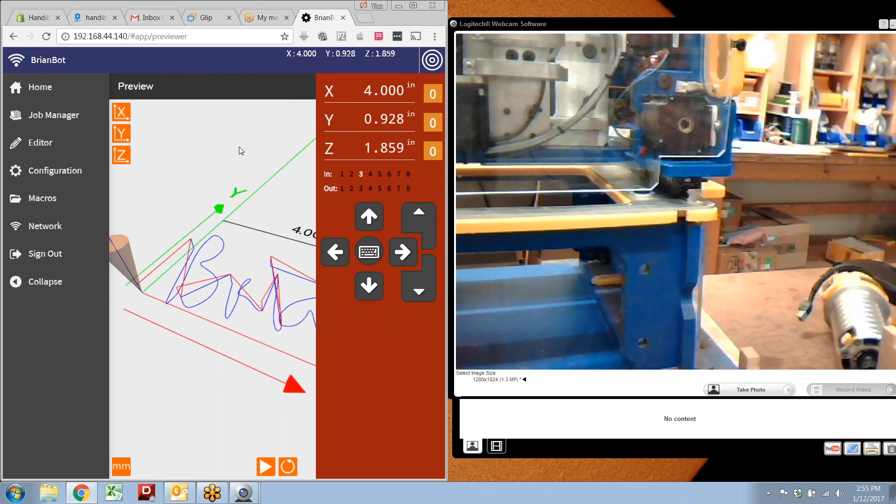We're going to show you a more technical thing, the process of reflashing your cards, and also the phone interface for FabMo. We've got another tool over here set up that is powered on, and we're going to connect to a computer.

Okay guys, you all had a question about your routers or whatever being held up by connecting to the FabMo software, but you actually don't need a computer to control it. You can do it off your phone, and that's what they're going to show you next.

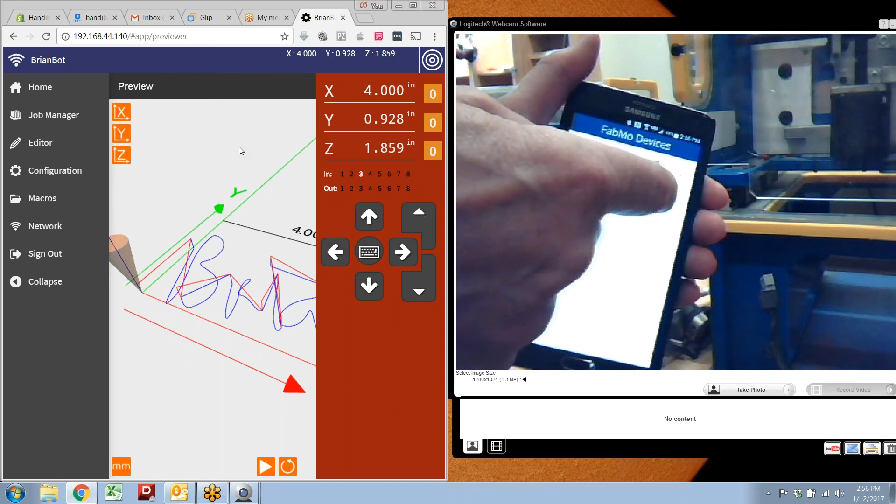The cool thing is that any jobs you submitted to your tool will still be stored on the tool, and you can run them from the phone, even if you designed and loaded them from your computer. Let me go back.

So what we're doing here is going to the FabMo Minder app, which some of you have already downloaded. It's also available on app stores. When you pull that up, it'll search your network and find any tools connected to the network your device is connected to. In this case, my tool, BrianBot, is up there at the top. Green button, and that'll pop you over to your preferred browser and open up the FabMo dashboard.

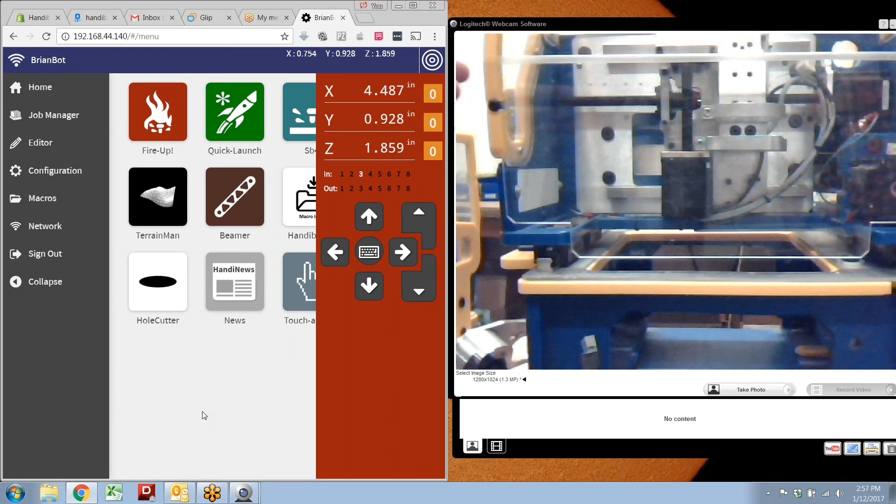You can see it looks exactly the same as the desktop version, just compressed a bit for mobile. So you have all the same functions, the keyboard controls, and all the apps as well. Touch screen presses will move the tool around, and you can run the zeroing routine and all that stuff from your phone too.

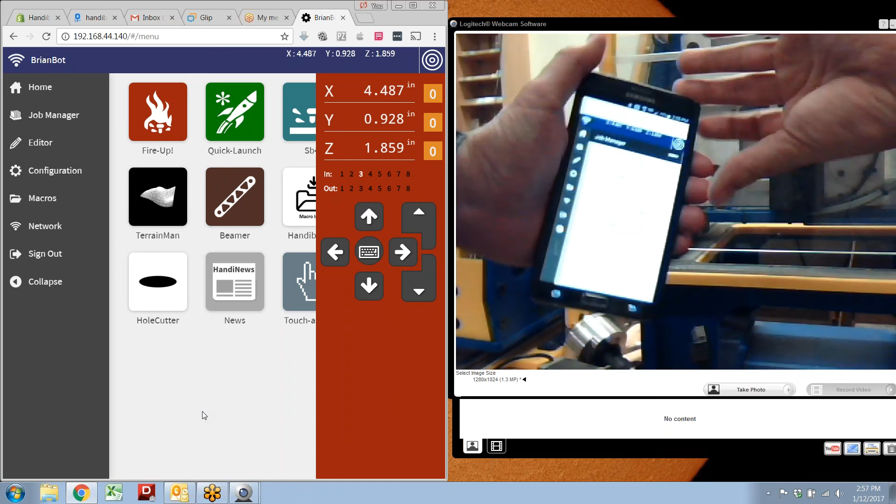Let's pull up the job manager. Same thing here, you get a list of jobs in your history, and you can pick out old jobs. Let me move this forward a little bit. The screen's a little bright, but you can see that's our list of previously run jobs, and you can select any of those and send them back to the queue, just like you would on the desktop version of FabMo.

A lot of times for me, when I'm going to work on something over the weekend, I'll load my jobs up from my laptop in my living room, then tote the Handibot out to the shop, and just run it from my phone. That way I don't have to carry my computer everywhere I go, so it's pretty helpful to me.

So unless you all have more questions about that, we wanted to show you how to perform the more deep updates on the card. Was there anything else? I had a quick question.

This is Jeff. I was having some network issues over the weekend, and I can only run in AP mode. FabMo wasn't finding the bot, and now that I know there's an iPhone app, it's still not finding the bot. I don't know if it's an issue with my card, or just wondering if you had any ideas. Are you sure you're on? Yeah, I'll jump in on that. This is Jared, I just want to add, I have not been able to get mine to talk to FabMo at all.

Let's start off by showing them how to update. So probably the best thing to do first is to update it using that USB thing and get everybody up to speed, because I don't know what versions you guys have.

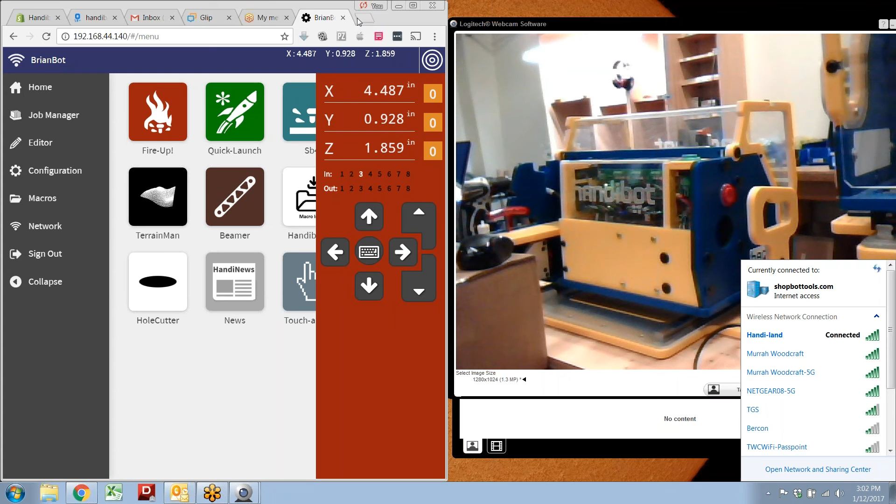If you've got something that can sniff the network, you can usually identify the IP address. The easiest way is to use Fing on a smartphone, then look down through the list of devices on your network and identify the device - I think they're all made by Murata, M-U-R-A-T-A - and that'll give you the IP for the Handibot on the network.

Okay, do you mind sending that over? Yeah, sure, and I'll show you how it looks on my phone real quick. So I've got Fing pulled up, and I'm on my wireless network here. I'm going to refresh my list, and since there's a lot of devices connected, it's searching through a lot of stuff. Once it finishes up, I scroll through here, and what I'm looking for is that Murata Manufacturing - that's the company that makes whatever the Wi-Fi transmitter is on the Edison.

So that IP address right here is for another tool in our shop, and here's the one I'm connected to right now, that .44.140 - that's the tool I'm using up there. So you can find all of your tools using this as well if you're not able to find it with the FabMo Minder. Is that F-I-N-G? Yep, F-I-N-G. Okay, gotcha.

The other thing to make sure of is if you're having trouble connecting to the local network, make sure your Handibot's actually connected to it, and make sure that IP address for the name of the tool is showing up, that it isn't actually failed and gone back into AP mode.

Can you say that one more time? So if you can connect to AP mode but can't connect to the local network...

Once you think you've gotten it connected, make sure it isn't actually broadcasting in AP mode anymore. So you shouldn't see its name in the listed networks on your device. Yeah, I know what you mean. If you type the word wrong, for me at least, that IP or that network name would go away.

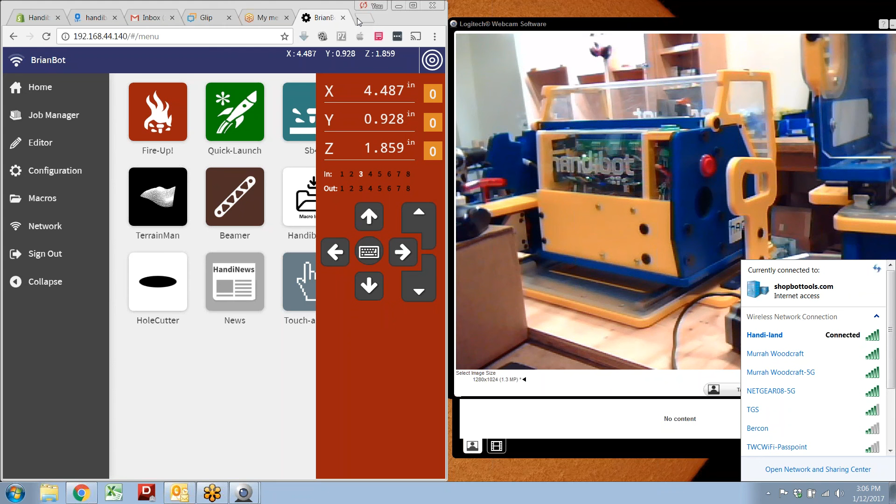I have a blue LED flashing on the board, does that mean anything? That's the heartbeat for the low-level motion processor. So if it's going in and out about every 4 seconds, that's right. Yeah, it's about every 4 seconds. Okay, that just tells you that the underlying motion system is live.

You said it was Murrah. That's what I'm looking for under mine. Okay, what if that doesn't show up?

So, but are you connected to the same wireless network on your device as you think the tool's connected to? Yep. Yeah, the AP mode no longer works. The IP address, and then I'm refreshing now. Can you guys still hear me? Yep. Okay, great. And I don't see it in the Fing app. Yeah, I still can't get FabMo to recognize it in AP mode.

What sort of network are you on? I'm just on my home network. Just on a regular router? Yep, I have no clue. Are you at home, Jeff? Because I'm in the office. I'm at home today just because I wanted to make sure, I heard that the Autodesk network had some problems for people.

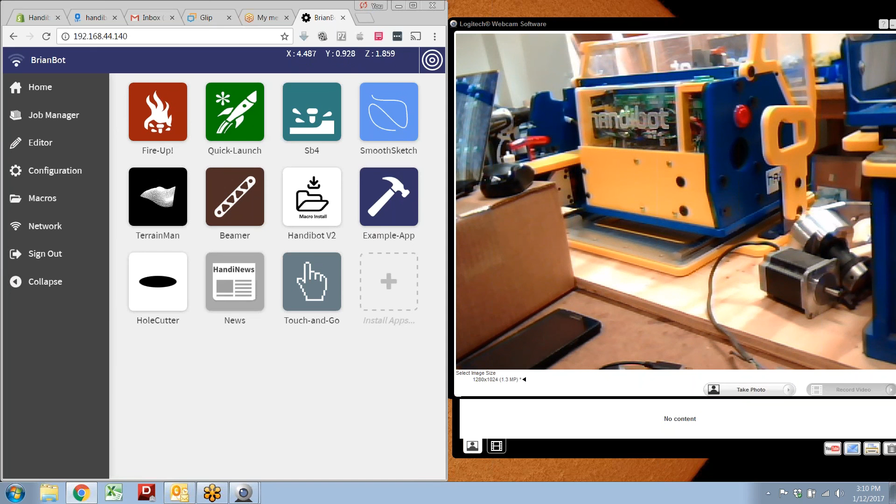Okay, I lost you on that one because when I clicked on go to dashboard, it takes me to 'do you want to leave?' And when I say yes, then it says this site can't be reached, which is what it was doing before.

That's pretty bizarre. Did it do that after a fresh power reset? Yeah, I've powered it on and off probably 24 times. Okay, and this is after you did the firmware update? Yes sir, I never even messed with it before I did the firmware update. That was the first thing I did. Boy, I don't understand that one.

Should I do the firmware update again? Well, for some reason the FabMo system's not starting right. The thing you were able to log on to is a lower level bit of software that really just loads the main thing and handles updates. So yeah, I'd try the update again, and make sure you let it sit powered up for 2 minutes after it finishes. Yeah, I did that, but I'll try it again.

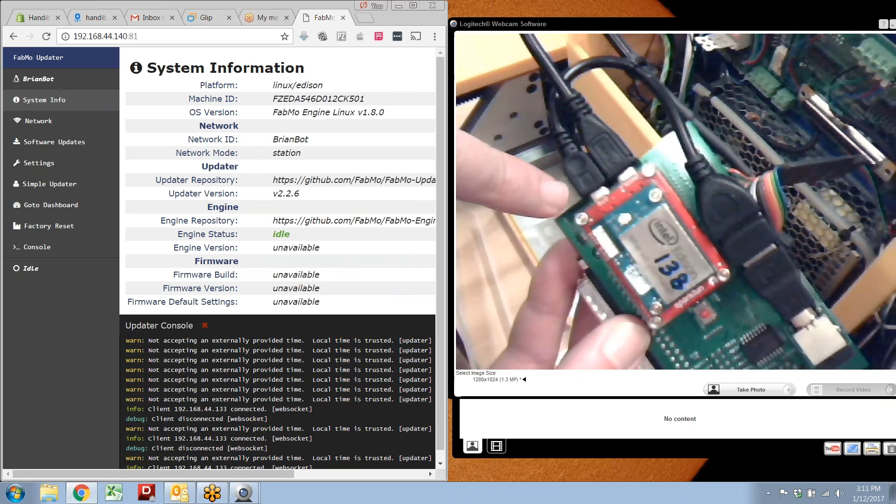I have a question for you. Are you sure the cables got plugged back in on the back right? Now that I'm thinking about it, it may be that you're powered up on the Edison, but not on the connection, right? Let me pull the cover off real quick. Yeah, let me get one out here. The ribbon is plugged in securely, and the 3-wire is plugged in securely, and it's plugged into the old... what are they called? Bus host or whatever. We want the USB connector, the micro connector, coming out of the OTG to feed back around and go into the big USB.

Okay, hold on a second. So the green and red wires coming out of the ribbon, which one do you want it to go into? Ignore the ribbon cable. The other one? Turn the card over so we're looking at the back. All right, let me power down. Yeah, pull this out.

Just jumping in here really quickly. I got mine to work using the Fing, so thanks, guys. Oh, good, really great.

Oh, okay, that's probably it. I think I switched the USBs. So the big one goes into OTG. Yep, and the one with the ribbon cable goes into the other one, the console one. Yep, that's the problem. You're not the first person to do that. Okay, plug it back in.

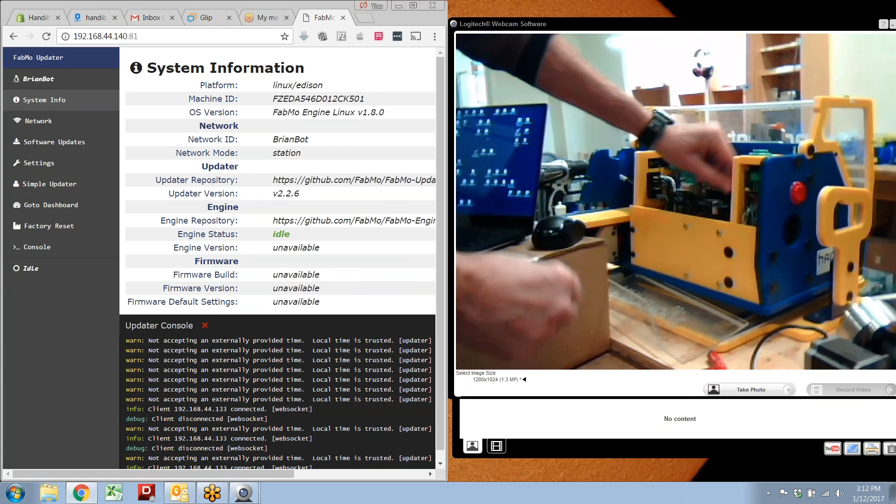I'm waiting on the Wi-Fi to pop up on my list. Okay, yeah, it can take like a couple minutes sometimes.

So while we're waiting, are you still there, Ivan? Yeah. Okay, I was going to make a list of the stuff I should have been making a list of all along, the stuff we're going to send out to everybody. So we're going to send out some ideas for jigs for holding material. Yeah, you and I need to decide on something they can have to hold material. Okay. And then we're going to take a look at the post processor, right? Right. And then a toolkit, and then collets. That's right, yeah, tool libraries for Fusion. And then, yeah, collet info. Yeah, so the tool library, the tools that go with the tool library. Mm-hmm, yeah.

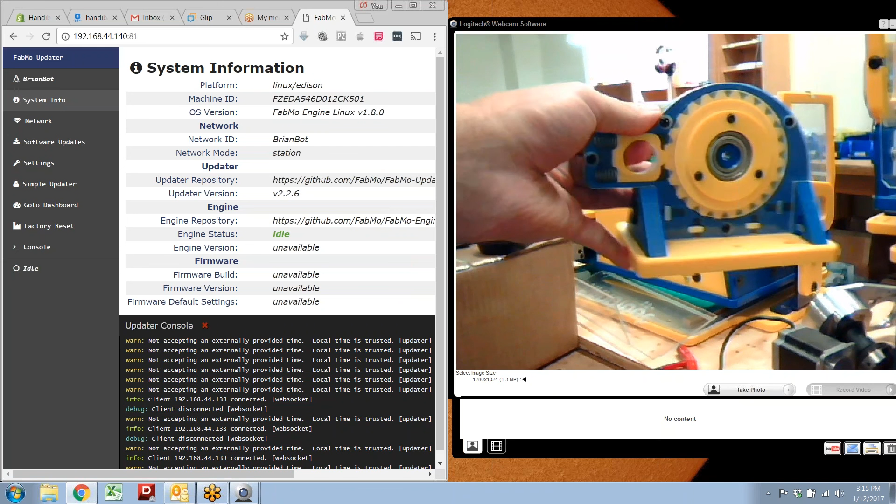Well, that might have been... you talking about this thing right here? Yeah, I think that might have been done in SolidWorks actually. That was... well, he was an intern at the time. He works for us full time now. You might have met him, he's Dave Price. Yeah, he was the guy that designed this, and he was either working in... we didn't have Fusion set up at the time, so I think he was working in SolidWorks.

Is that open source or proprietary? Oh, this? Yeah, this is open. I haven't put it up online yet, just because I haven't gotten around to it.

But yeah, this is definitely open. I'd have to - can you have them send those files then? Sure, I can open SolidWorks files. Okay. Wait, can Fusion open SolidWorks files? Oh yeah, really? And I can, you know.

It can open them, guys. They're just dumb models, so. Oh, well, that's still better than, yeah. Someone sent me a SolidWorks file today, and I was trying to figure out how thick it was, and I

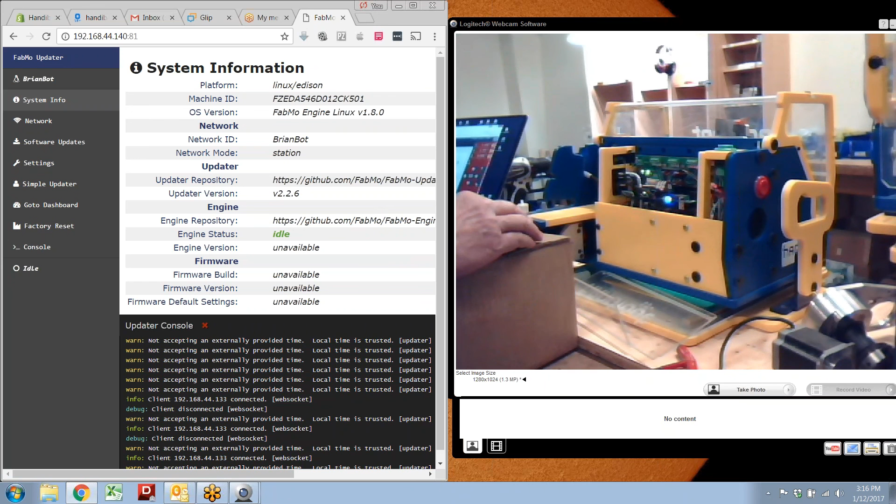couldn't open it, so that's good to know. That seemed to be the problem. I'm good. Good. All right, perfect. The Fabmo Minder app did not work, but I just typed it into a web browser, and it worked fine. And then hopefully the network connection issue will also be fixed as well.

Blue was the thing, right? Mm-hmm.

Hey Jeff, so you were saying it's impossible to put this on the Autodesk website network? I don't know if it's - I'm at home today, but I heard that there was issues with it. Jared, I was trying to do it here in the build space, and I wasn't able to.

Yeah, so what I've actually been doing, if I did want to keep my computer on the internet and connect to the Handibot, is I've been connecting both my computer and the Handibot to my MiFi hotspot, because that thing only needs the password. What else works really well, or at least worked for me today, before I figured out the network thing, was if you plug an Ethernet into your laptop and then use a Wi-Fi card to connect to the Fabmo, it still works. Oh, interesting. Okay.

That's a good call. It just meant that I had to put the Handibot in my bedroom. You can get a longer Ethernet cable. I could, but not in the short time that I discovered this fix. So.

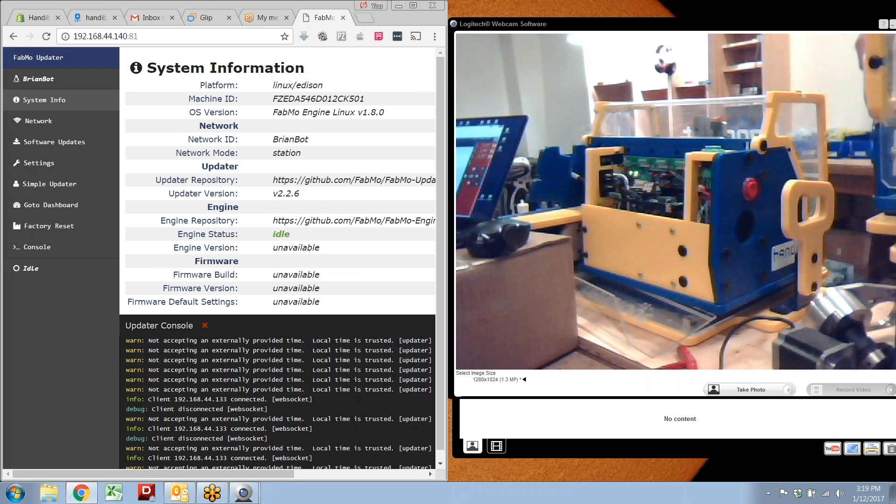Where would they find that? Because I think that's what we would want definitely to have set up in the build space, because when people just come in and they have something that they want to cut, especially the number of people that are potentially going to be using this machine, it would be nice to not have everybody go through the pairing process every time they wanted to use the machine.

Yeah, well, we could send you a couple of those, and then you can figure out if you want more. I mean, it's pretty simple once you see it. It's just a hub and a slightly different connector for the USB.

Okay. Yeah, so it's just a little Ethernet hub with a USB hub with an Ethernet jack in one end of it. Okay, you kind of shuffle a few things. You kind of plug it into itself at some point.

Yeah, okay, so this is the guy you need, which is just a USB hub with the Ethernet on it. Amazon sells them. And then a slightly different connector that plugs into the card. So it's USB A to B rather than micro USB. So we'll send you a couple of these, and then you guys can decide whether you want to do more.

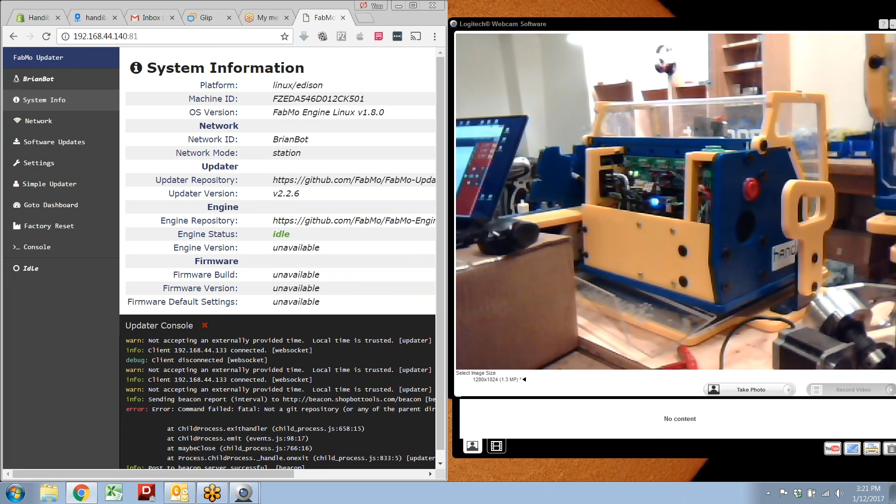Okay, I can stay on and talk about the fixturing board if you got time now. Sure, why not? Okay, so you have the plastic one, but it's not currently designed for the Handibot, correct? Oh, this plastic one that I was just showing y'all?

Yeah, that's made for the Handibot specifically. Yeah, but you have to have that great big support base, right? Oh, or no? Yeah, you do. We don't want to have to carry the big support base, so we'd like that T-slot to sit inside of the current machine or be able to bolt it onto something that we have on the machine.

So would you want the T-slot from front to back or left to right? Ooh, that's something to think about. Man, I guess we could make it so that it could work either way, but it's a square. Yeah, we'll just make it so it works either way. Okay.

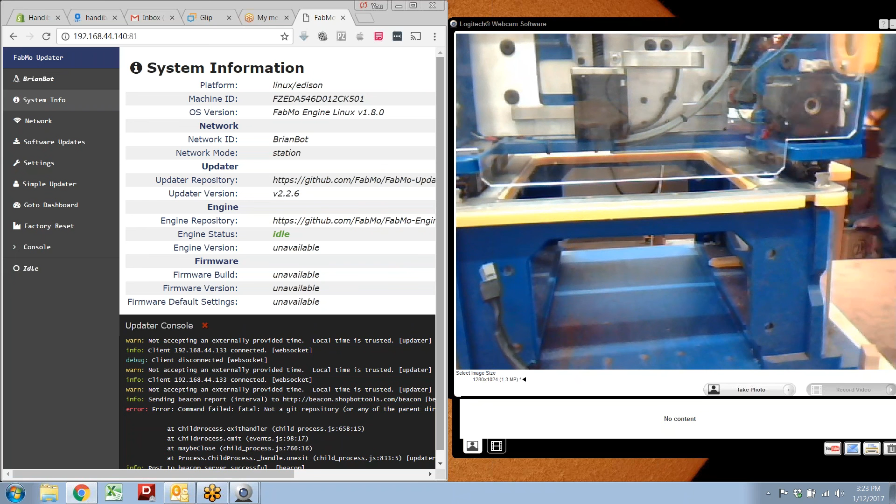So let me get my... I'm sure there's some kind of sketch function on GoToMeeting, but it's going to be slower than me just drawing it on a piece of paper. So, all right, I'm thinking... let me get this thing out of the way. I'm thinking that you've got that base that ships with the Handibot.

So this is sort of the way that jig is set up right now. And these little steps are here, and they have like a square piece on the end, like that, which is there just to keep the tool exactly nested in the right location.

So what we could do is we could make this T-slot thing slide through here. But if the width was right, if this dimension was the same as this dimension, then you could slide it through that way or that way. And then we would just need some kind of pin in here, or a bolt that you tighten down that locks it, so then you could slide it in and out.

And then also what we'll need to think about is looking at it from the side, like you've got your little feet that are holding the tool up, and then you've got your T-slots running through here, and then you're going to have a vise right here, right? Right. So maybe you want to have a couple of different sets of these things so that you could lift the tool up high enough that the vise could slide under the tool as well.

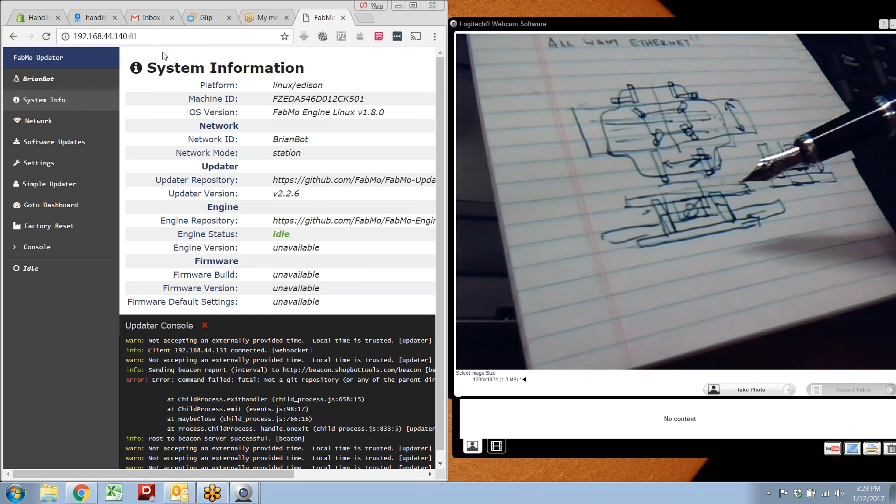Okay, and what size are the T-slots that you have currently? They are, I think this dimension right here is like 3/4 of an inch, and it's for a 1/4-20 screw, supposed to fit down in that slot.

So we're using, here, let me, T-nuts that work with it? Do what now? Do you have T-nuts that work with it? Yeah, let me show you what we got here. Okay, get this guy out.

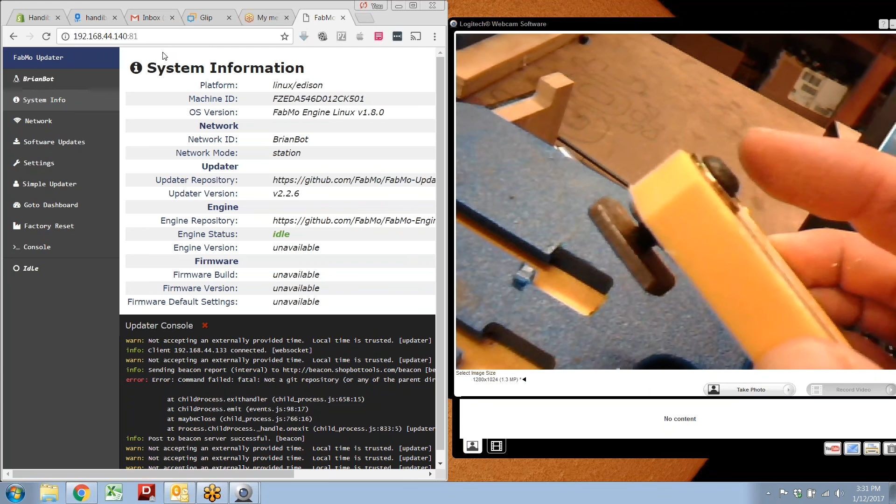So we're just using these little weld nuts. They're like the low profile weld nuts you can buy from McMaster, rather than the T-nuts you'll buy from 80/20 or whoever else sells them, because these are cheaper. I just buy a bag of 100 of these and throw them in there. You can even buy nylon screws, and that way if you eat your screw up, you're not hurting your tool. I just sent links to the Ethernet adapter and cable you need to everybody from Amazon.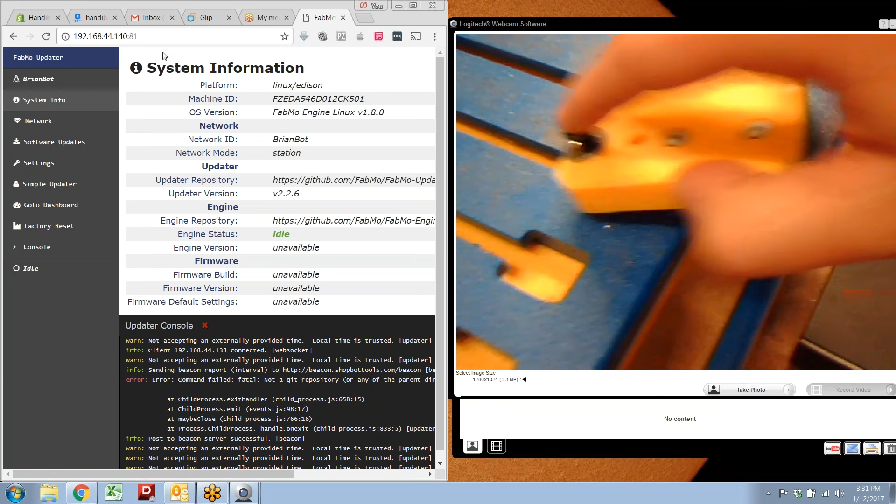We'll send a photograph of that connection. The connection's sort of unintuitive but easy. I like that, unintuitive but easy. Unintuitive but deep - you won't know what the hell to do, but what the hell to do is pretty easy, when it works really well. Yeah, I like that system quite a bit. That's pretty cool, I think it'll work.

And even the L bars could be out of that same material too. Yeah, and of course anything smaller than 6x8 you can always just make more of them on the Handibot. Pretty cool, yeah, that's exactly what they need. Okay, we'll get it taken care of.

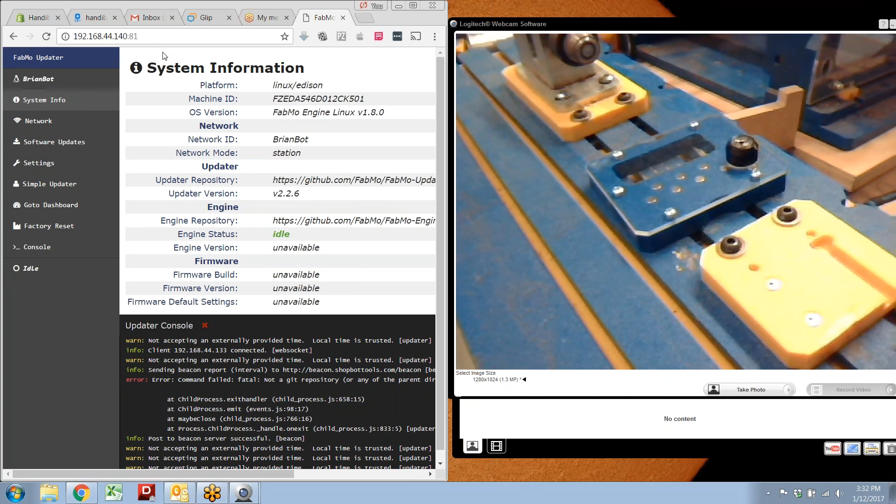That'd be good. If you're going to use that same system you've got there with the same spacing and all of that, if you could send me one of those flat boards, then I could start working out some fixtures for projects too. You mean this thing, or the blue board? Oh, the blue board, okay.

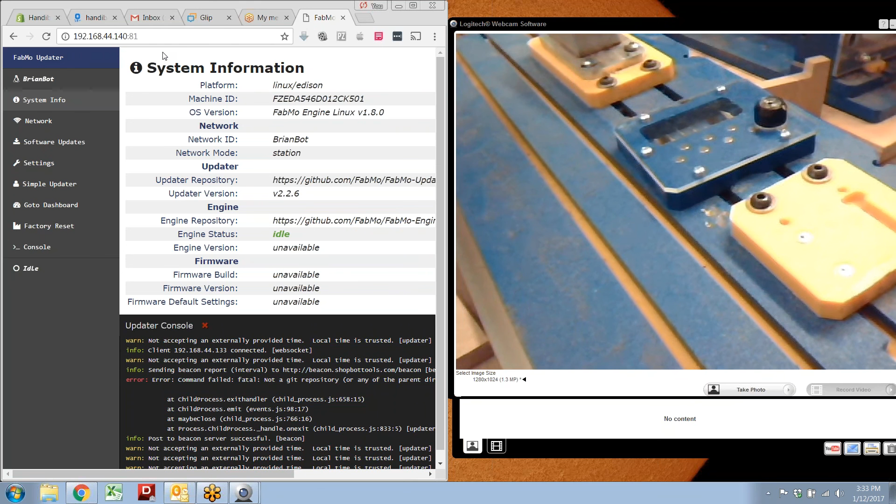Right, so I can figure out what you're going to do. How wide is that right now? Is that wide enough to go into the Handibot? Yeah, that's wide enough. Here's my dirty secret - I make these as I go to ship them out for people that buy them, and I'm actually all out. So I'm going to have to make a new one anyway, so by that time I might as well have just designed it and given you that one. Yeah, you make the one that actually fits in the Handibot, makes sense. Exactly.

Sounds grand. Yeah, that'll really help everybody be able to process lots of students, and it'll actually help at shows too. Cool, yeah, we'll probably use it ourselves. So that sounds great.

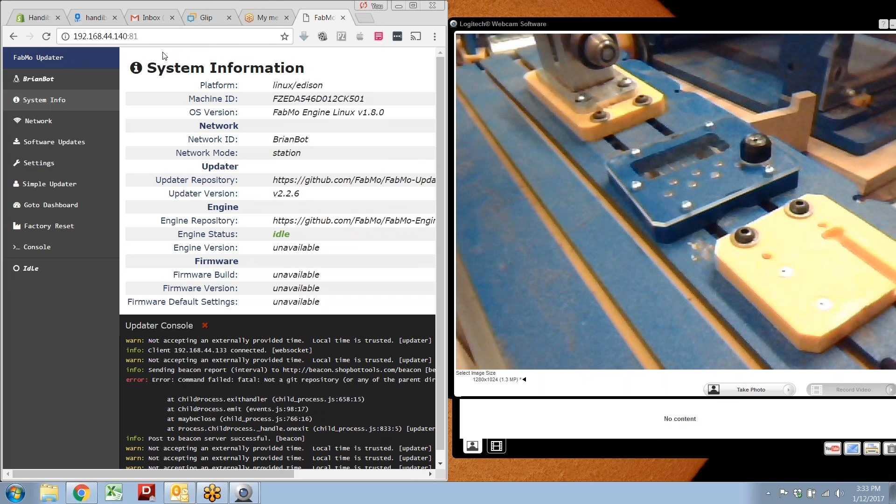What does the aluminum piece cost? This thing right here, yeah. I think this costs like $30. So kind of expensive to me for what it is, but I guess it's not that bad really. $30 for like a 30-inch long piece of this, I believe.

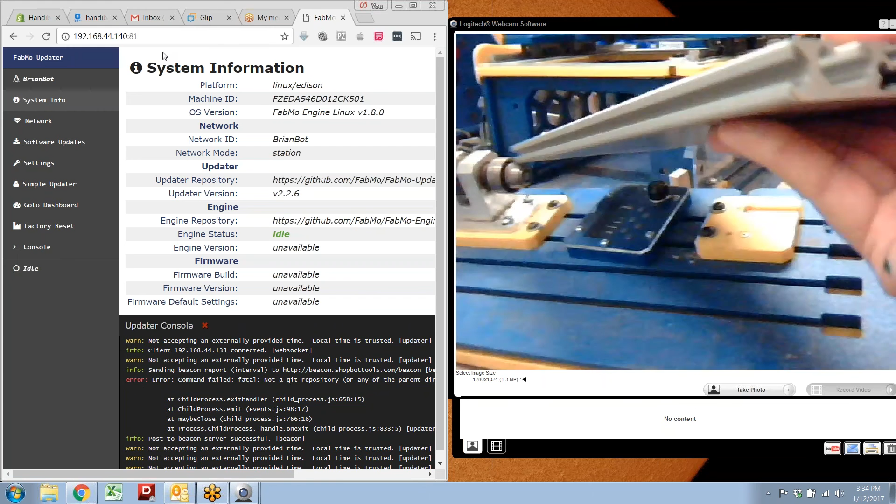And then how much would you actually need of it? Well, I think this is exactly 6 inches wide already, but you'd probably want about 20 inches of it to stick out a little bit on both sides of the Handibot to give you something to grab onto. I'm just trying to think, in the Handibot would that actually fit the whole width and possible length you need, or is it undersized? Yeah, it's about, I mean, it's actually exactly the right size.

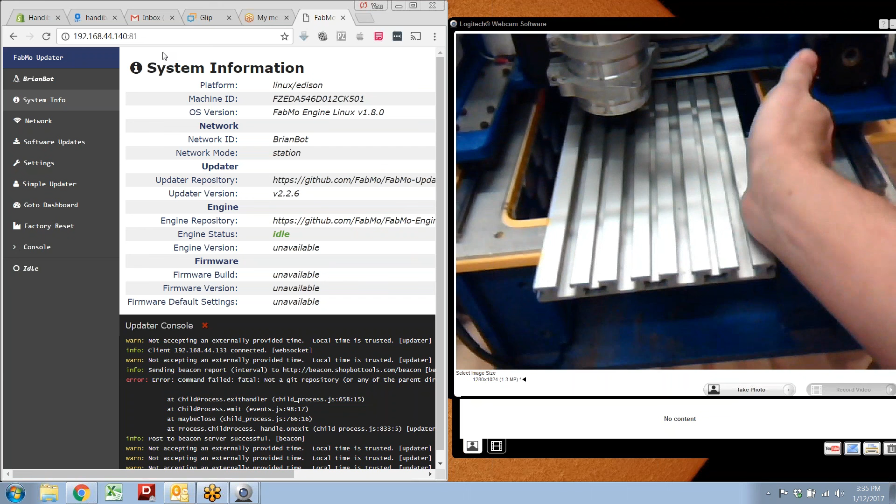Because the Handibot doesn't cut all the way over to the entire extent of this hole right here - that hole is just the size to fit the router through. So you could put that on there and be able to cut the full 6 inches of whatever on there, as long as you slid it through this way. So what's the total width of that board, of the aluminum plate then? 6 inches, I'm pretty sure. We'll measure it, hold on.

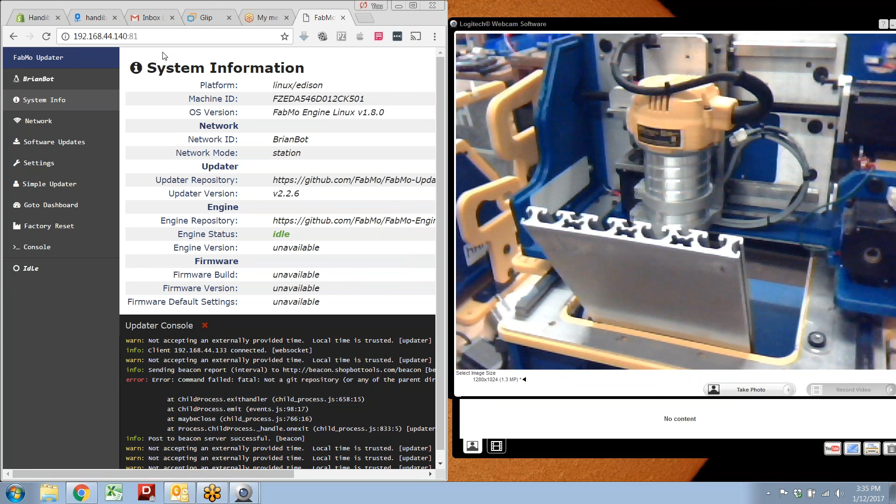Because what you'd really want is one that was 8 with another slot extra, or 10. I think after 3 they make them in even numbered slot counts. So you think you'd go up to 6, which would be a little over? Yeah, see, I would go with 8 so you can actually have a slot to put a clamp up against the material. You always want your fixturing table larger than your machining envelope. So do you guys carry 8s or 10s?

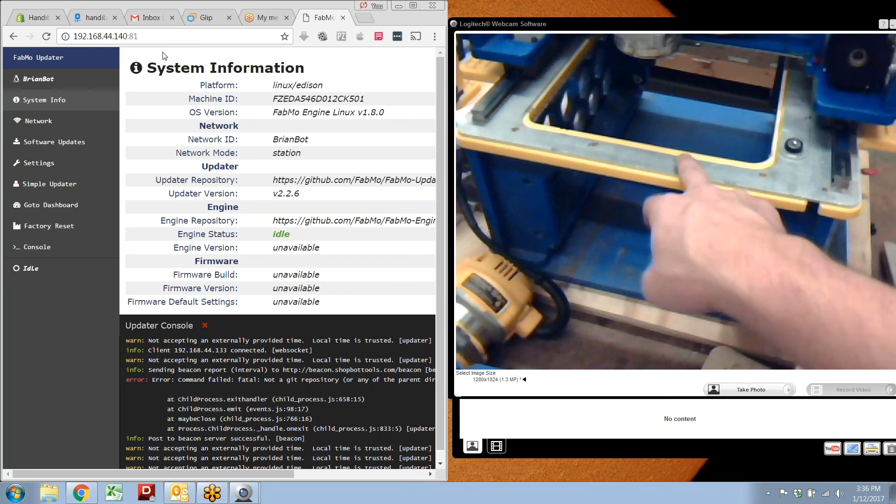No, I just happen to have this because it's part of another tool, but this is the biggest one we use for anything. Have you ever heard of Misumi? How wide is the slot in the Handibot? This opening right here? Let's measure it. I can't recall off the top of my head. We're 9 inches in the horizontal, and we're 10 and a half in the long dimension, kind of rough.

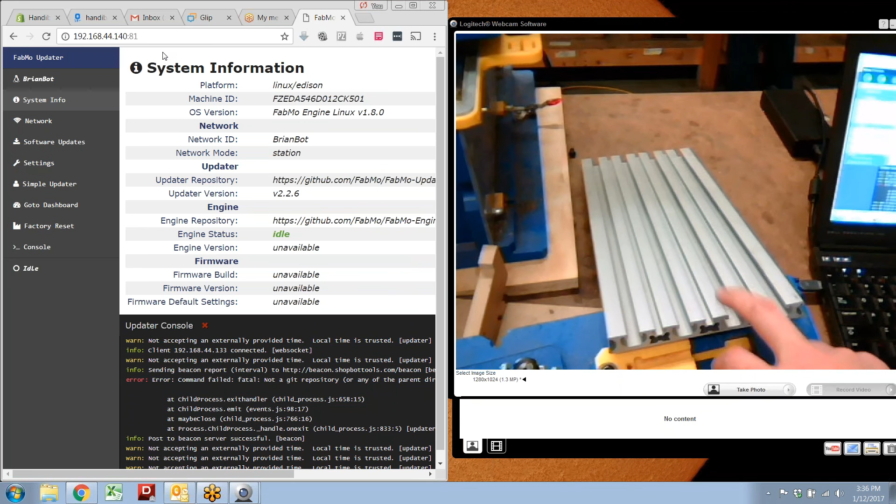There's an industrial supply website called Misumi, M-I-S-U-M-I, and they sell all varieties of this stuff, and they'll cut it to length in the factory for you and send you exactly what you want. I used to use them for designing factory floor equipment all the time, and they're a little pricey, but they're fast and really easy to use, and they give you free CAD models of everything. I'll send you a link to them.

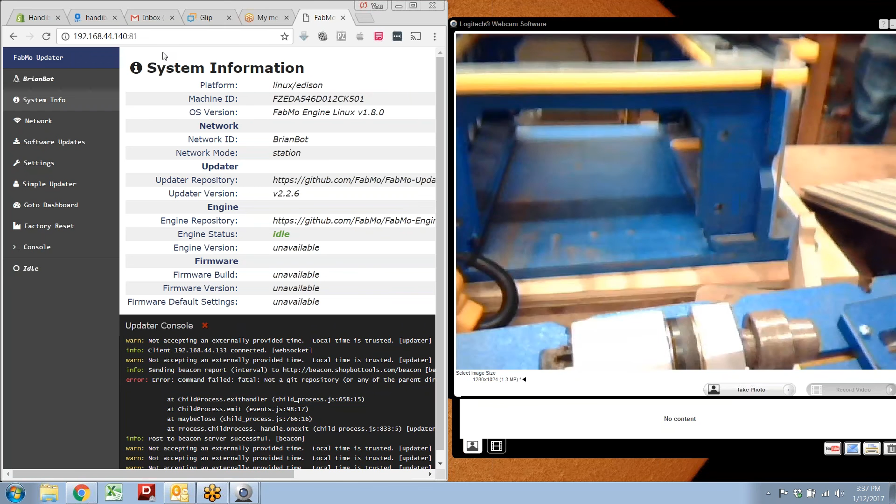Configurable components, huh? M-I-S-U-M-I? Wait, M-U-S-I-M-I, I'm sorry, I spelled that wrong probably. It's Japanese. Okay, one more time. M-I-S-U-M-I. My brain is falling apart quickly here. Hold on, I'll write it down. M-I-S-U-M-I. There you go, I got it right now.

So you said they're cheaper than 80/20 then? They're better than 80/20, just more configurable, and they give you more options. They're easier to work with because you can do everything through the web store, you don't have to talk to anybody or pick up a catalog. You just put it in your shopping cart and order it, and it comes to you, and it's right. I think they're a lot better, and the stuff's prettier, it doesn't have weird grooves on it. They make good stuff. Good to know.

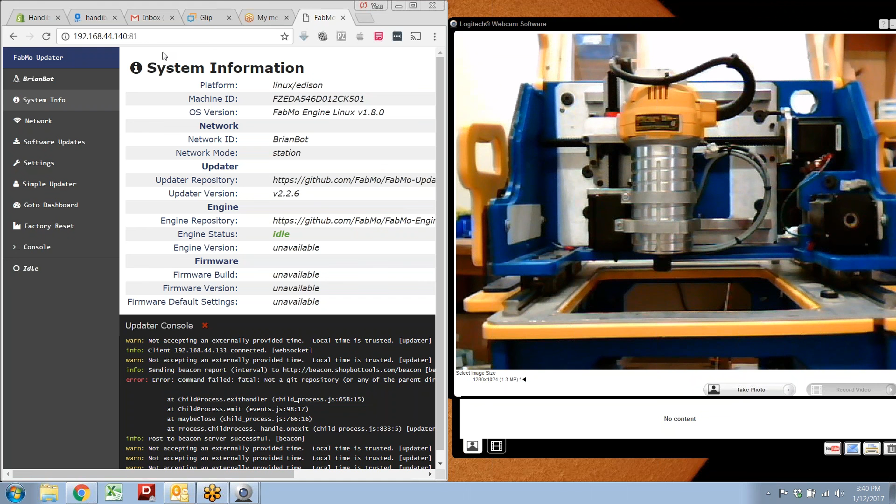Okay, so starboard is what you got. Who do you guys source the starboard from? We used to use Norva Plastics in Norfolk, Virginia, but we use this company called Sabic, S-A-B-I-C, and they're actually in Raleigh, near us, so it's nice because they can pop by and drop it off personally. But if you've got a Reed Plastics or AIM Plastics or any plastics wholesaler, they'll have it. It's HDPE, you don't need starboard brand, high density polyethylene. Any plastics wholesaler or distributor local to you will have it.

And they have all the colors too, or are these guys special? They make green, red, blue, yellow, black, and white. I asked for pink one time and they said, can you order like 1,000 sheets of it? And I said no. So Amazon sells it in cut up chunks too, you can just order from Amazon.

What's the thickness it comes in? Does it stop at 1 inch? I think they have thicker than 1 inch, but I've not seen more than 1 inch, it's pretty heavy at 1 inch. The other place I get it from is McMaster, but they only have black and white, so it's kind of boring. Let me pull this up and see. I can get 4 inch thick, 12 by 48 by 4 inch, that's only $550, guys. That's a good deal.